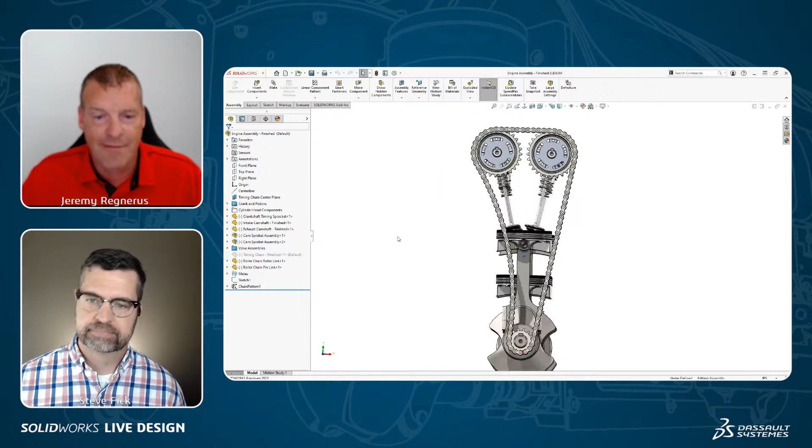Now, we're not going to get into the debate of belts versus chains in an engine design, but I want to show, some people were a little bit surprised about how a timing chain in an engine works. There's a tension side, and then basically there's a slack side on this. So I'm going to pull up a couple images here for reference.

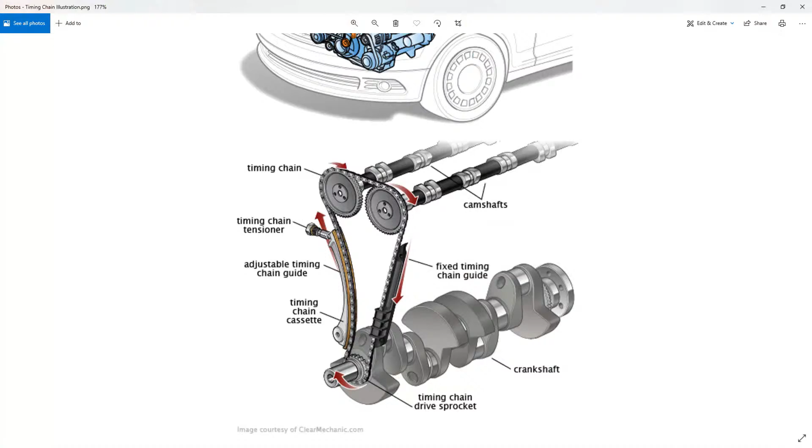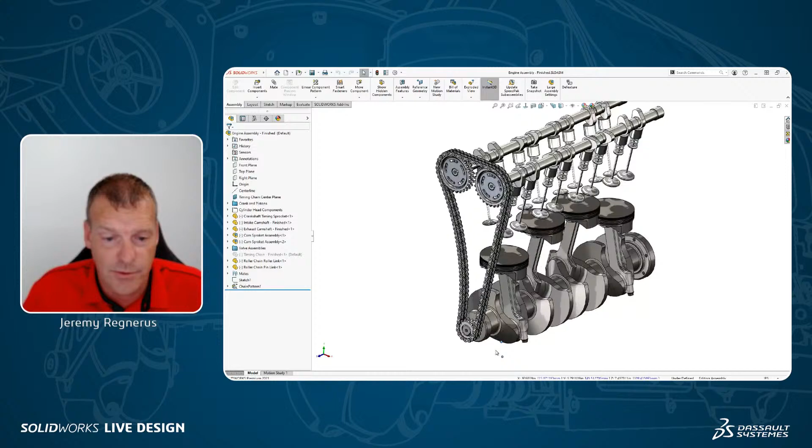Now, where are we going with this? Well, we want to get the timing of all this to work, because people really like that in SolidWorks you can do really cool motion here. You'll notice everything works here. We have a chain that's driving our cams. Everything's in time. They're at the correct ratio. So how do we get that motion in that chain? How do we design that chain? There's a couple different challenges we're going to look at. And believe it or not, we're not going to start with this assembly of this chain. We're going to tackle this two different ways, because there's really two different ways you could approach this design.

One, doing it all assembly based like this. But the other way is, how are you purchasing the chain? Is it a single part number? Well, then does it make sense to just do this as like a multi-body part right here? And we're going to start with this. We're going to start modeling this chain as a part using a variety of feature patterns.

Then we're going to actually leverage some of that information that we get there to design the moving version of this. So why don't we go ahead and dive in? I'm going to close this. We're going to start with a fresh assembly here. And I have this set up a little bit wrong.

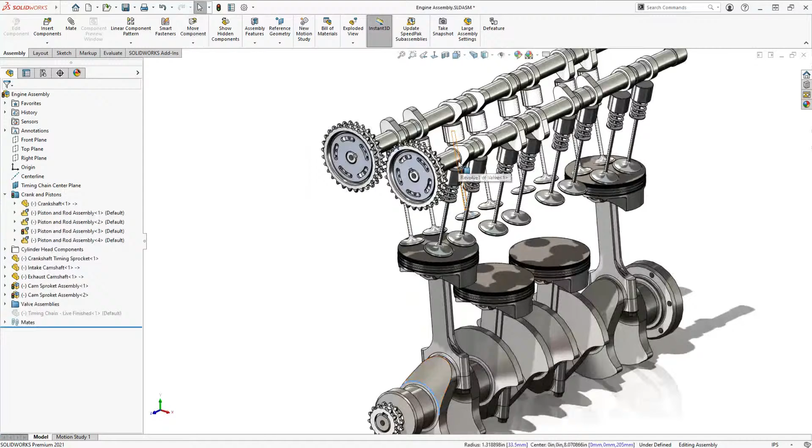We're going to mix some things up here because I want to talk about designing things in the right orientation, right? So we have all these components. They're kind of moved in weird spots. They move independently. So Steve, you can see we have a rotation here on our crankshaft. We have each camshaft kind of rotates individually. You can see I have some cam mates there on the tappets for the valves.

One of the first things we want to do when we think about aligning everything and getting it all set up right is getting it in a home position or a fixed spot where we know where every component needs to be at a certain point throughout this rotation. In an engine, that's called top dead center. That's where cylinder number 1 is at the top, and it's right before the intake stroke on a 4-cycle.

So you're saying, like a lot of us, it's that urge to grab a part, start rotating it, moving it around because we can, but how do we get it right back to where we actually need it to be for what we're designing? Absolutely. All right. So top dead center for this is with this first piston all the way up at the top of its stroke. That's why it's called top dead center on an engine.

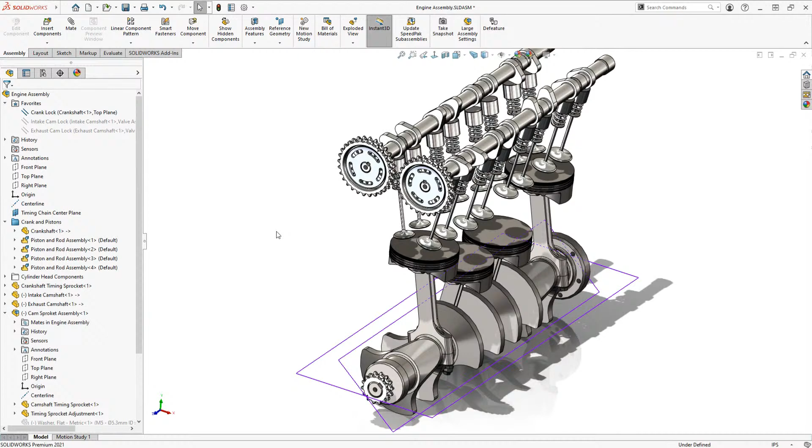So I have some mates here that I'm just going to unsuppress for time's sake. But what I've done is I've used favorites. This is a good way if you need to turn things on or off. So you saw me with motion before. I just turned these off. I could always turn them back on. I have a parallel mate that I made from the top plane of the crankshaft to the top plane of my assembly. No matter where, this is going to set that at top dead center right there. So now these components can't move anymore.

Now, what I need here is this camshaft to be right before the intake cycle starts. I have some mates here, but I might as well show how I did these. One of the things that's interesting about this camshaft design, if I hide these two pieces, is they're not straight up and down. So the first thing might be, well, don't you just want to go top to top and make those parallel? Well, now you can see my timing is off. That cam actually needs to be advanced several degrees further.

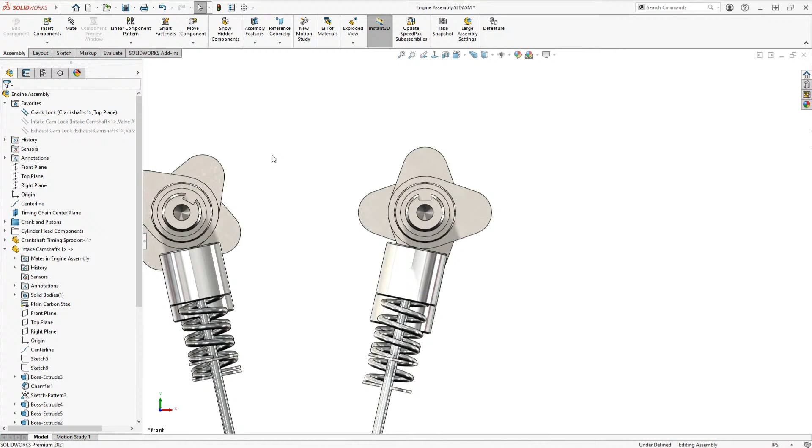So let's undo that. What I actually want is that top plane to be parallel or perpendicular to the direction that this valve is going. So in this case, I'm going to just make that parallel to the top of that valve tappet. Now, does that make sense to the audience, why I've done that? Like, to the valve and not to the assembly? Yeah, let's ask if this is making sense. Give a thumbs up or let us know if you have questions.

I think one of the questions that came up is, to your point earlier, you're just using mates. You're not using Instant 3D or anything like that, correct? No, Instant 3D is more when you're creating features in a part, and we will be leveraging Instant 3D quite a bit. This is just me grabbing these components and moving them around. And basically I've created these mates, so you'll see in the tree there's no dashed lines in front of any of these components. They're all fully defined. Now I'm going to remove these two parallels that I just created.

And Jeremy, how do we add to favorites? Just real quick, you showed the favorites.

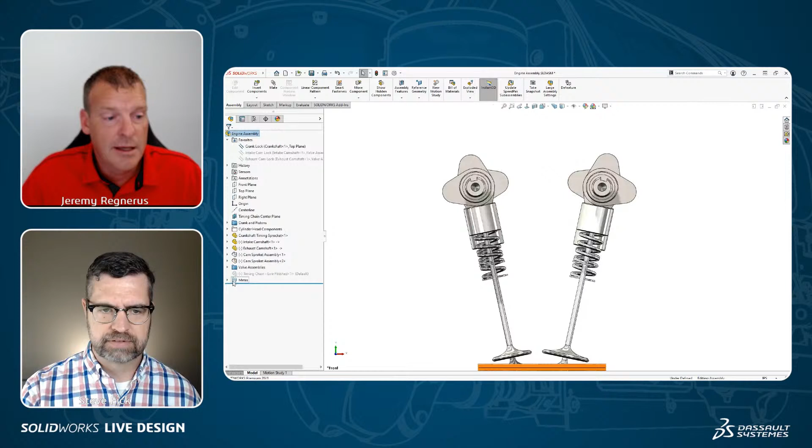I think that's an amazing tip. How do we get those there? So I have a couple mates that I need to reference, right? So I just suppress those and I want to access those. So if I dive into my mates right here, I have a mate here. I have this one called crank lock, and then I have these two parallel mates here that kind of lock everything in place. Those aren't the ones I actually wanted. Where did they go? Let me see where these are really quick.

Well, an easy way to do this, right, is I'm going to grab this component, this camshaft, and I'm going to press my D key, and I need to find that parallel mate I just had. So before we get to adding to favorites, I do want to show this. This is pretty cool. You have this ability from breadcrumbs to go grab these mates. There it is. Now I can see where it is in the tree. I did have the right ones. The parallel mate I did was slightly different.

So to add to favorites, I'm going to grab these two mates and I'm just going to right click, and you'll see here there's an option to add to favorites. Got it. Very cool. So I took the long way to answer your question. Sorry about that. No worries.

I want to make sure I have the right one there. Yeah, I do definitely have the right ones. See, there was a ton of mates in here. I didn't want to crowd this tree out with that. So we added those to our favorites. So anyway, all of our components are locked in place. So what I want to do is I want to start designing that timing chain. I'm going to turn these cam sprockets on too. They are not locked in place. So those are the wrong mates.

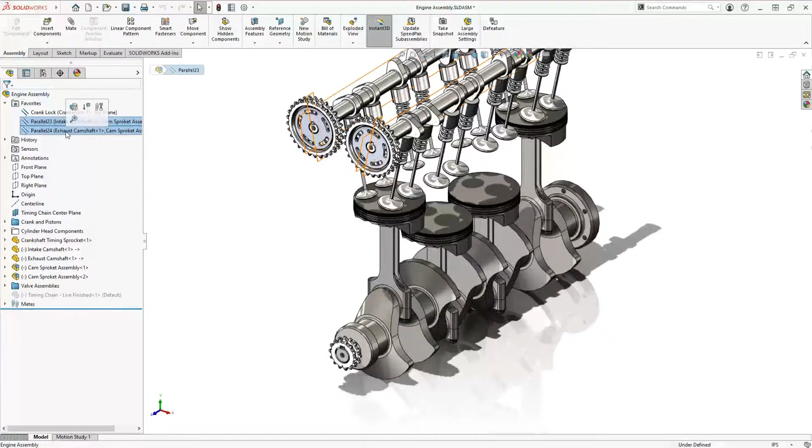Let's do this. And I think this is the cool thing about what Jeremy's showing with favorites and folders and whatnot, is that oftentimes that list of mates gets terribly long, and it is nice to have those at your fingertips, right? You're not having to scroll through or try to find them. We're able to just add them to favorites and get to them easily.

Yeah, so I did have the wrong mates. They were called intake cam lock and exhaust cam lock. So by the way, they were right here. They were named. I don't know why I didn't see these. One of the things I like to do is if I have a mate that I need to reference, I'll come in here and I'll press F2 and I'll rename that. That also helps with what you were talking about, Steve, finding that mate in that tree. If it's got a name, it's probably easier to find. Favorites are a really good way to access those as well.

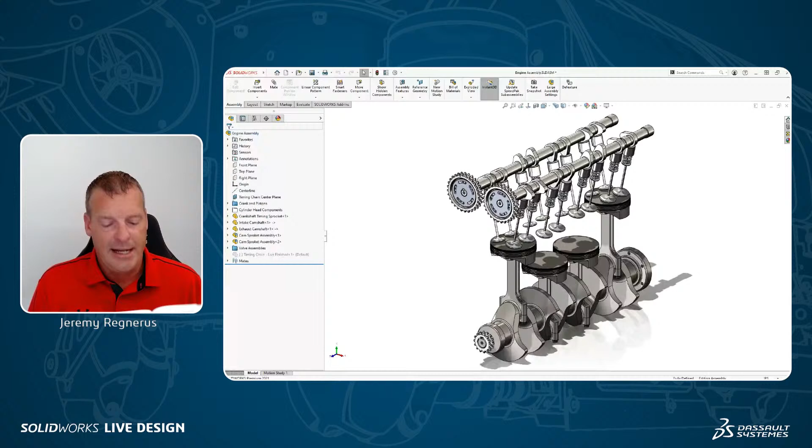All right, so we want to start designing. Let's get into the patterns part of this. So for reference, for designing this timing chain, I do have a book here. We were talking about it at the beginning of the show, the Machinery's Handbook. I'm going to be designing a roller chain, and I'll pull this up on screen in a picture. So in the Machinery's Handbook, you have transmission roller chain. I'm going to be using that for all my dimensional data.

So for reference, let's throw this up on screen. These are the dimensions of the chain links that we're going to be modeling. I'm going to have these over on the side of my screen as a cheat sheet so that I don't have to be referencing the book and looking it up in a table. But we're going to start a new part. And I happen to have a part called chain template. I did this to save me some time, because I actually used some equations. I created some global variables with all those values in it as well, so maybe I can reference those.

So, I think that's an interesting point. We do this sometimes for presentations, but part templates can store a lot of great stuff, not only equations, but geometry and all that kind of stuff that you can just start with right away.

Yeah, I did a live design last year where we did some spur and helical gears, and very similarly, I went through it. It really talked a lot about equations, and I used global variables a lot. If you want to watch that, you can go to our live design 2020 playlist on YouTube, and you can see that video where we do a spur and helical gear there.

And we really get into the equation side of this. So I'm not going to spend a lot of time on that today. I'm going to start sketching what I think this timing chain is going to look like. I'm going to draw a couple circles. And you'll notice, Steve, I'm not really locking anything in place. Let's just kind of snap these together.

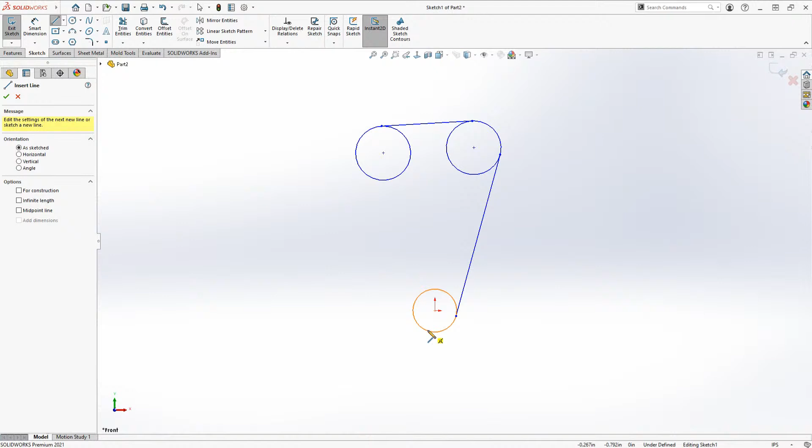You'll notice I'm using that really cool capability in SolidWorks where when you draw a line and pull it off of an arc, notice how it captures tangency there. I'm going to go something like that. Looks sort of like what we're going to be doing. Maybe. Let's go ahead and save this, and we'll talk about how we're going to use this in a minute. Timing chain, we'll just call this live.

And I want to bring this into my design. I'm going to do this just with a drag and drop to make this easy. And I'll turn on my sketches so you can see where that component is. Now, I started very loose, totally undefined sketch. What I want to do is I want to get this timing chain in position.

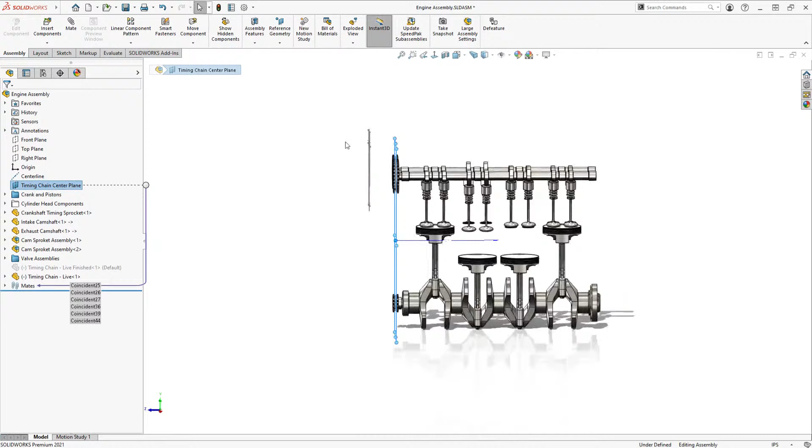Now, you'll notice I have a plane here that if we look at my right-hand view, happens to go right down the center line of this double strand timing chain. So I'm going to use that plane and the front plane of my timing chain to locate these two components. So we'll grab those two. And I really just like to use the pop-up menu here to mate those two together.

Yeah. So just a real quick recap. What you saw Jeremy do, you can tile vertically side by side. He grabbed the name of the part. He just dragged it in, and then you're just mating up the planes, right? Right, absolutely. Perfect.

And I think I've talked about this in other presentations I've given. If you have the opportunity to mate to a plane in a component versus, say, a face that you might delete later on, I always recommend mating to planes. Planes never go away. You're always going to have a front, top, and right plane. This works well if the plane is in a good spot in the component, which happens to be the center line down here. That's a great point.

What we're going to do now is we're going to define this timing chain profile. And right in the assembly, we're going to do a little bit of top-down design. Now, top-down design is where we define features of a component in another assembly. And to do this, I'm just going to click on one of these sketch components, and I'm going to choose Edit Sketch. Now, Toby Schnaars did a really good presentation on changing colors for top-down design 2 weeks ago. Really encourage you to go watch that.

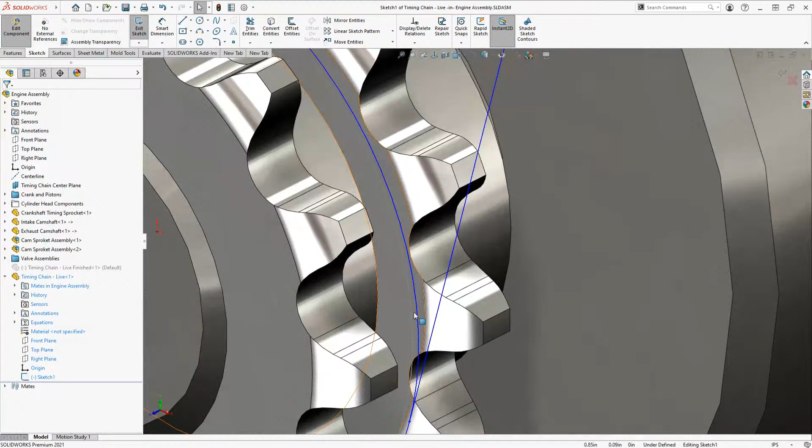I like to keep the colors the same, and then I look at the color of the component in the feature manager tree. So here you can see it's changed to this blue color, letting me know that I'm editing it. You'll notice that on each of these sprockets, I have a circle that represents the pitch diameter. If you're unfamiliar, a pitch diameter is really where those chain links are going to follow that sprocket around. And that's what I want to define this profile path on.

So I'm going to make these two circles equal to one another. And you'll notice that that line turns black, signifying it's fully defined. And we're going to do the same thing with these sprockets up here. I have a pitch diameter, and I'm going to grab this circle, and I'm going to make them co-radial. Now, for those who don't know, co-radial is the same as making them equal and concentric at the same time. It's just a 2-for-1. I like to use it a lot because it saves me some time. And you'll notice really quickly, I have a fully defined sketch now.

So before I go over to my part file, I want to take a look at this. When I set everything to top dead center in the beginning, one of the things that did is it set my bottom sprocket, or where my bottom roller is going to go, right vertical with center. So I added that design intent intentionally, so that I knew that I would be able to create that there. And that's going to be important when we start working inside of this part file.

Jeremy, real quick, we got some really great chat going on, some questions. Just to that point about going back to top dead center, we had a question come in from Dallas: is it better to use configurations or to use favorites where you're just suppressing and unsuppressing the mates? Do you personally have a preference on how you would go about that? I mean, it really depends on what you're doing.

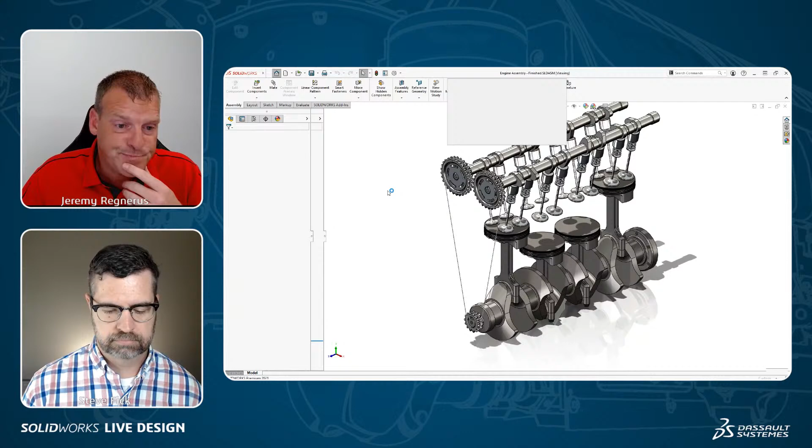I'm going to save this really quick. I'll open up the other one that we just had up. In the beginning, I actually had configurations in there. I prefer to use configurations myself more for positional changes. Oops, I opened the wrong one there. Let's open this guy. So in this example, I absolutely did use configurations. So here I have a configuration where all of the features are fixed and I'm using a single part design, but I also have another configuration which is not named very well. And this configuration is the one that allows all of the motion.

So absolutely, I always think it's a good idea. Pneumatic cylinders are a good example, right, Steve? You have an extended position, a retracted position, and then a lot of times I'll use a free floating configuration in there. So I think configurations are perfect for that type of thing. Yep. When you kind of understand exactly what the motion is that you want, but I feel like favorites sometimes are just an easy way to just be playing around with mates until you've firmed up that configuration that you're after.

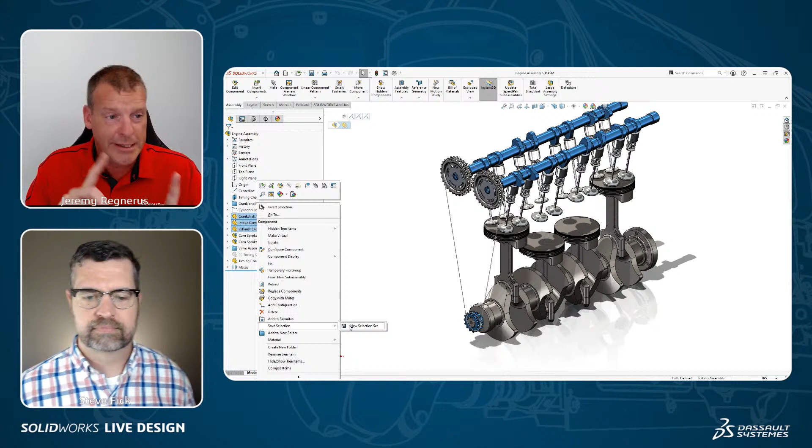And a few folks out there who have started using SolidWorks 2021 may be aware, maybe it was 2020, we added this other thing called selection sets, where you could create a selection set. They don't actually work with mates in 2021. That's why I use favorites. So that's an enhancement request to get submitted, that mates can be part of selection sets there. Good to know. Just a tip.

All right, so we're going to open this up. I want to get started on the actual design. So this sketch, we'll call this our chain path. I'm going to give this a name. You'll see me naming things quite a bit. One of the other things is, I'm going to tile, you'll see me jumping back and forth quite a bit. I drew that sketch right down the center line of this chain, but I actually want to be designing my roller on this front half here.

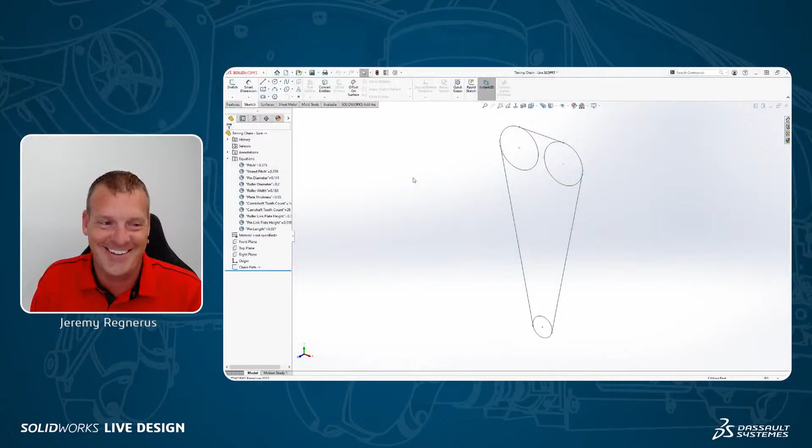So what I'm going to go ahead and do is I have one of those dimensions in here that we saw, our strand pitch, 0.399, crazy weird English number. Sorry, we're using inches for our international audience. I have looked high and low to find metric roller chain, and they all refer to the ANSI standards. So it kind of all falls back to these bizarre numbers anyway.

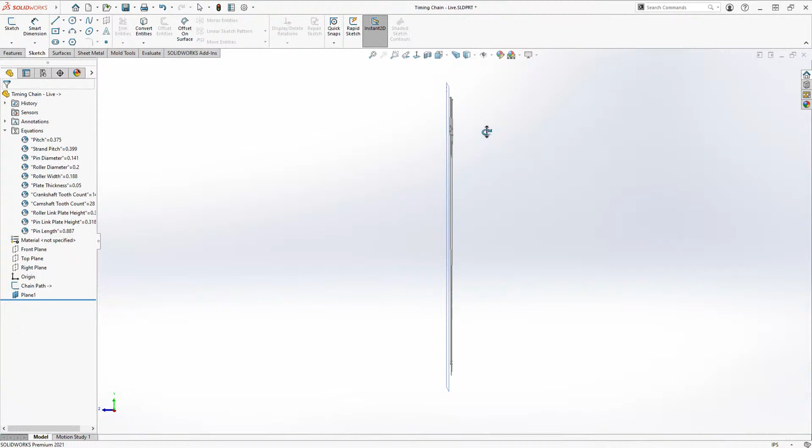Well, what I'm going to do is create a reference plane that we're going to leverage here. And I'm just going to drag this out, some arbitrary value right here. I want to drive that offset. I want that to be half of that strand distance. So I'm going to double click on this. We talked about this in my last live design that I did last year. I'm going to grab that strand pitch, and I just want that to be half of that value. So I'm just going to type strand pitch divided by 2, hit OK, and then do a quick update, and you'll see that that plane has now got that correct offset. We're going to be leveraging that.

The other thing is we're going to be creating a lot of circular patterns, and I need the centers of each of these sprockets right here. So I'm going to select my front plane, grab the center of the circle right here, and I'm going to grab an axis, and I'm going to do this 3 times. I want to create a rotational axis about each of these circles. So I'm setting myself up for something I know I have to do in the future. Keep in mind, you don't have to do this at the beginning of your design.

And for those of you who are wondering how I'm confirming so fast, I use mouse gestures and I just swipe really fast. So I apologize if the people online aren't seeing me hit that OK button that fast.

Yeah, I was just going to say, you're using the S key to access it super quick, right? Right where your mouse is, and then mouse gestures to just confirm it once it's done. Yeah, I love the S key. I love the mouse gestures for quick actions. I use them for my view. You don't even see it. I'm so used to it. So there's my front view, top view, my isometric view, and I do it so fast that you don't even see it sometimes. So I apologize. I'm so used to doing that.

Let's name this. Let's call this front strand center, and then we're going to name these. I'm going to call this crank center line.

We'll call this... While you're naming those, just a few shout outs. Todd is saying he absolutely loves the top-down design. So you got some good thumbs up there for sure. Yeah, good job.

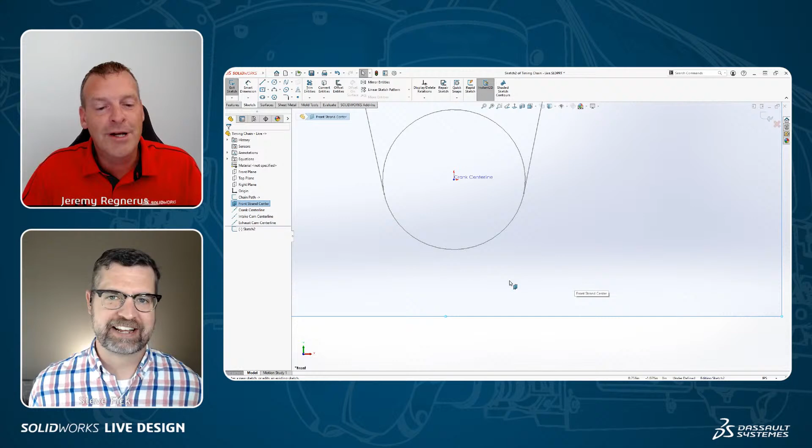All right. So we've got a bunch of reference geometry we're going to make use of. Because of time, I'm going to get going a little bit quicker here. So we're going to start by creating, I'm only going to be working on these rollers right now, kind of for the sake of time. And again, you'll see me type in dimensions. I kind of know what these are. So I'm going to do 0.2 right here. I'm just going to get that outside diameter of that roller.

And if I wanted, I could get really clever here. I want these two to be vertical because I talked about that vertical alignment. Now, if I wanted to get really clever, I could actually come in here and I could do a link value. And you'll see here, I have my roller diameter. And now if I were for some reason to come over into my equations, I could change that roller diameter value right here, and it would update everywhere that value is used. Again, go back to the previous live design to take a really deep dive into that.

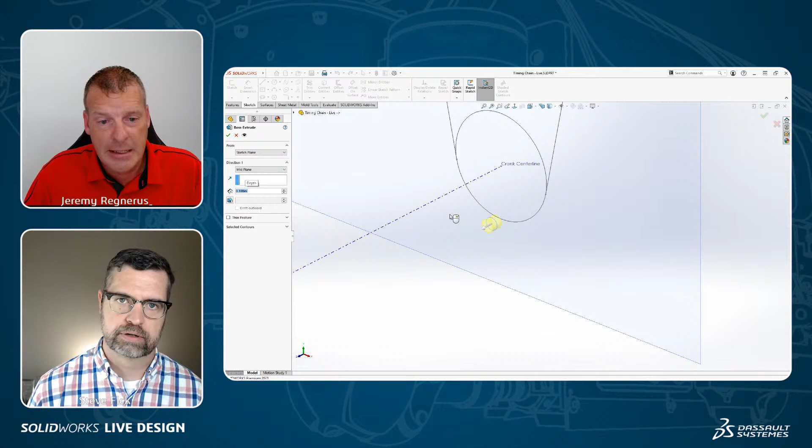So as Jeremy started to draw this out, what you're seeing is just this idea of placing those rollers on the pitch diameter, which is the center line of where that chain is going to hit the sprocket and line up where it needs to be from there. Mike Puckett is also making a great shout out here, saying that the chain and belt is actually part of the CSWE. We're going to take a look at chain and belt here in a little bit. Actually, the assembly feature also. Yep.

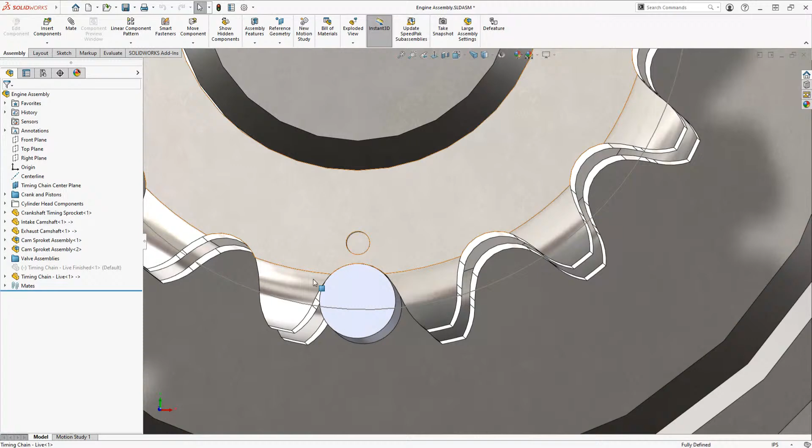So what I've done, you just alluded to this, Steve, is if I go back to my assembly and I look at what am I actually doing? Why are you just drawing this cylinder out in space? What I'm doing is I'm creating that roller that's going to live right inside of that sprocket. So hopefully that makes sense, why I captured that pitch diameter, because I know if I put that roller on there and I design that to the right size, that's now in the appropriate location. That's kind of why I've started there. And the roller is the easiest way to start.

I want to take a look at, okay, so how do we pattern this at this point? And I'm going to shut off my axes and my planes. And I'm just doing this with hotkeys. This is the same thing as coming up here. I've made hotkeys, Shift A for axes, Alt A for temporary axes, Shift P for planes. So you'll see me turning stuff on and off quite a bit. And the first question I expect is why wouldn't we do this just with a curve-driven pattern?

So I'm going to create a new sketch because I don't want to lose my original sketch here. Let's create a curve-driven pattern really quickly to take a look at why or why not we would use a curve-driven pattern. So for those who don't know what a curve-driven pattern is, I'm going to come here. I don't even know where it is in my command manager anymore, Steve. I'm so used to going into my shortcut menu. So you have this pattern type called curve-driven pattern.

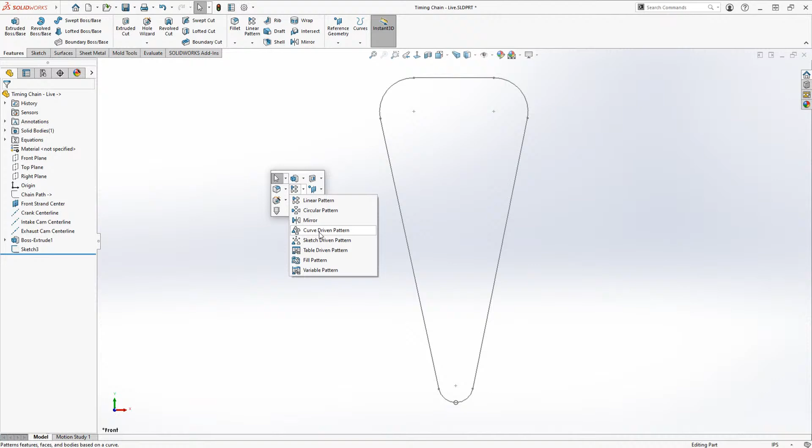And what we're going to do is we're going to pattern a body, okay? So we're not going to pattern a feature because I know that the distance between each of these links is 3/8 of an inch or 0.375. So I'm going to grab that body, and that's going to create a multi-body part file.

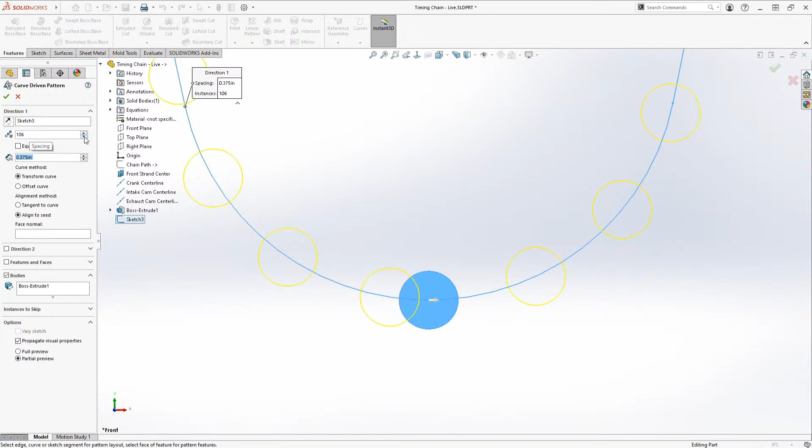I also need to choose my path, and I'm going to just expand my tree, and I'm going to grab that sketch. And then we're going to set our pitch right here. What's our pitch? 3/8 of an inch. That looks really good. There is something strange going on right here. These don't quite line up. Is that because I have the wrong number of them? I don't know. Let's go take a look at what happens in the assembly when I do that.

So what you're going to see here, if I zoom in down here, is this looks pretty good. But right, you see it right away on the first link. Notice this, Steve. Notice this little gap right here that's starting to happen. Yeah, I see it. And that gap gets bigger, and that gap gets bigger. Let's ask the audience, why do they think that gap is getting bigger when I do a curve-driven pattern?

Yeah, if you know why this is happening, if you've got kind of the deep cut answer to this, Jeremy's going to obviously let us know. But let's see if you guys can guess why this is happening on this design in the chat.

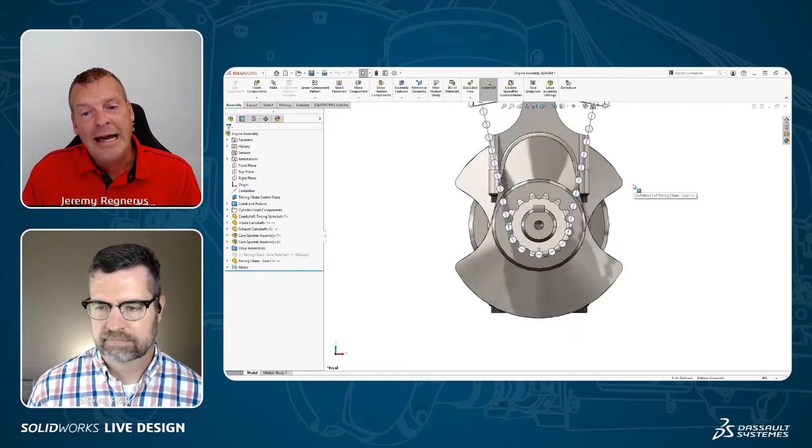And you can see here when we get around to the other side, it gets really clear. Now that could be because we don't have the right number of links and we have that transition. But I really want to talk about this gap that's taking place here. I'll give you a hint. It has to do specifically with chains. Okay. Right? All right.

So I'm going to start a sketch. We're going to talk about this problem right here. I'm going to start a sketch, and I'm going to do some convert entities right here. I want to tell the story better, so using all the wrong tools. So let's create an arc here. Let's make this arc and this line equal to one another to tell this story. All right, so we're going to give the answer here.

Are there any answers in chat yet? There is a delay on the chat, Steve. It looks like Gary's saying, could it be that that isn't adjusted to the proper polar coordinates? And Timborora says the circumference, pitch. Yeah, so Bocek's jumping in with pitch. So we got a couple good answers. All right, well, let's take a look.

So we set the distance between those two components to be 0.375 in English units, 3/8 of an inch. Let's dimension to the centers of these circles right here. And what is going on? Look at this value, Steve. That's not 0.375. No. So what is 0.375? Well, this distance between this center and this center, if I draw a line right here, is what we call a chordal distance on an arc. It's the distance between 2 points on an arc.

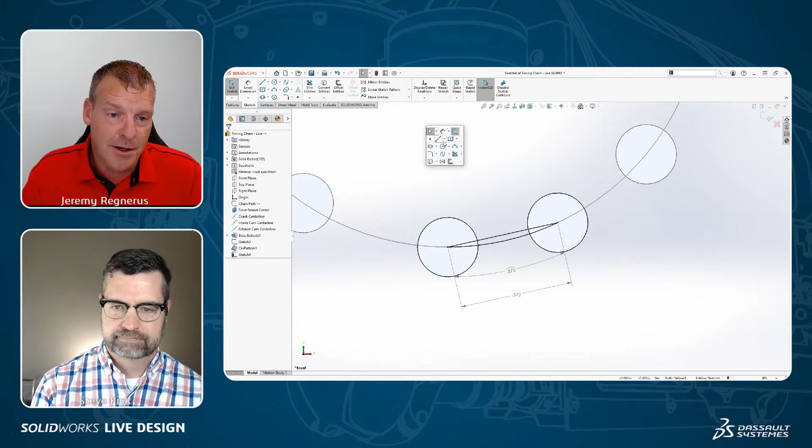Now, the reason that dialog's popping up is these are fully defined sketch entities, so it's just telling us these are reference dimensions. Here's another tip along those lines, Steve. What if I wanted to define the angle between these two? Oh, yeah. You do very similar. You can go center to center, and then if you pick the center of those points, look at that. It'll tell me the angle between those 2 points without having to create construction geometry. So many good little tips.

Yeah. Many. So we know that curve driven doesn't work because curve driven doesn't actually have an option for chordal length.

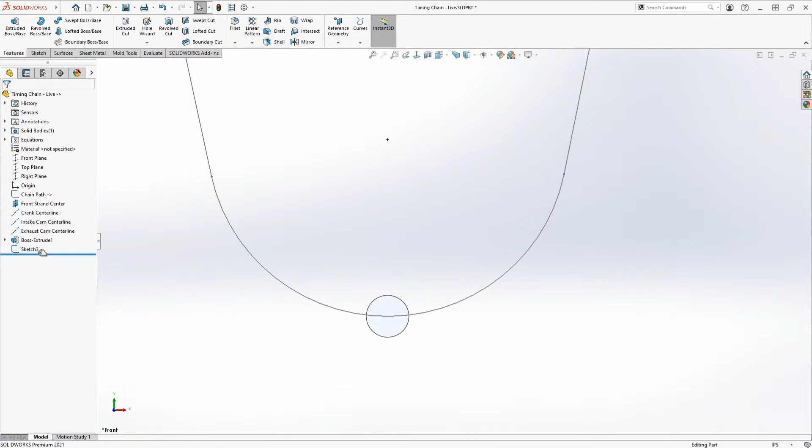It's not necessarily meant for just chains. Yeah. So let's delete that. Let's look at, so now we have to solve this. I'm going to call it the hard way. And I'm going to delete this sketch and I'm going to turn the other one back on.

So we're going to leverage some other pattern types here. What I'm going to do is I'm going to start by leveraging this circle. And we all know, I think at this point, that we're not going to end up with a straight line here. And I'm going to tell you it's going to confuse me. So I'm going to delete this guy. And we'll come back to figuring out that arc later.

All right. So we're going to come in here. We're going to create a circular pattern instead. And I'm going to leverage bodies here. And we're going to choose our axes. Now, you saw me create an axis there. And the reason I did that is because you can't actually use a sketch circle as your axis of rotation. So I'm going to go up to my view key, view axes, and turn those on. And I'm going to select that crank center line.

Okay. Now, there's 2 ways of defining this. We have to get that dimensional value there. Well, I know I have 14 teeth on my sprocket, so I could just say equal space 14. Now that's going to go all the way around here. So how do I get rid of some of those? Well, you can actually do this option called instances to skip, because we know that I don't need that full rotation of entities. Right, right.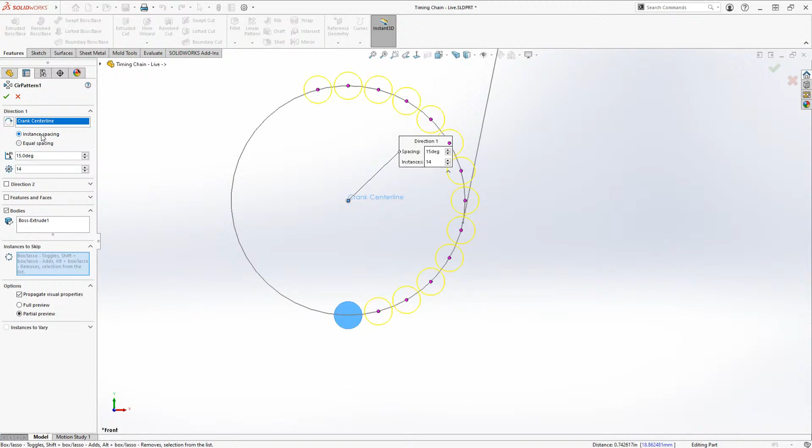Now, the other way you could do this is you could type in the problem here. You could type in 360 degrees divided by 14, and you could do instance spacing this way, and then you could come back and do it that way. There's no right or wrong way here. In fact, this way you could drive with an equation if you wanted to.

I'm going to do equal spacing. I'm going to set it to 14, and then we're going to go in here. We're going to get rid of some of these instances. So we're not going to create a roller bearing in space where it doesn't belong, right? We want these roller bearings to go up this line. So let's go ahead. Let's delete these. We're just going to remove these instances.

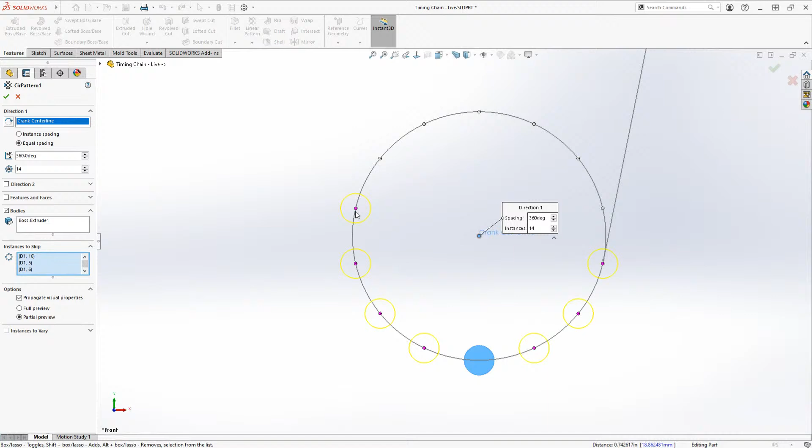And now we get into this weird conundrum of, well, where does that curve that we're going to create later start? Right. I don't know. Let's just leave this here. I think it's 3, maybe 4. I'm going to leave it. Because guess what? It's parametric. We could always go back and edit it, right? Yeah, yeah. All right. So we've started this.

Now what we want to do is we want our roller links to go up and around. So we're going to create another sketch. And here I'm going to start getting fast because we're at 11:34 right now. Yeah. So I'm going to draw a circle. I'm going to show you a tip that I really like here that I just learned. Well, I'll show it to you on the next pattern I create, actually.

So what I'm going to do is, for simplicity, I'm just going to make these 2 arcs equal to one another because I know that they're the same diameter. And I want to set the distance between the center of this and the center of this, that chord length or that linkage length right here. And I'm going to grab these 2 arcs, and there's something wrong with this dimension right here. And that's the vertical spacing between those. Some users have run into this, where it's flipping around.

So this is the dimension I want right here, right? I want that distance, but I want the dimension out here. You look at your cursor, Steve, there's a little blue icon on the right mouse button with a lock. This will actually lock that angular dimension or that aligned dimension. So now I can pull it out. Now I can go ahead and I can type in that 0.375. I overlooked that for the longest time until I was like, why is the mouse blue? I'm like, oh.

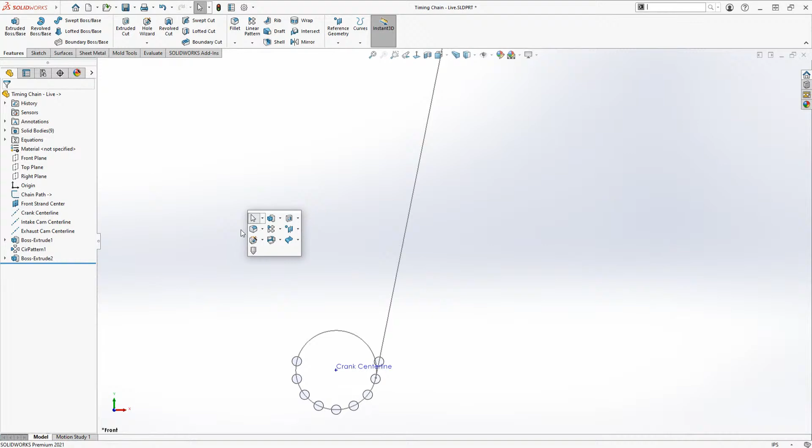So we're going to go ahead here. We're going to go to a linear pattern, and I'm going to select my direction. And again, we're working in multi-bodies because none of these touch. We're going to grab this body. And we're going to set that chain pitch, that number we looked at before, that 0.375.

And now I have to figure out in my head, how many do I need? 6, 7. This is going to take a really long time. This could take a while, man. We're tight on time. All right.

Well, let's try a really cool option that came out a couple years ago inside of SolidWorks that I absolutely love. It's called Up to Reference. And maybe I don't care about how many there are. I just want them to have a spacing of 0.375 and go up to this point. Yep. Look at that. It automatically figures out how many of them I need. It stops right before it gets to that point and it won't create any more.

This option rocked my world when it came out. I remember back to all the machine design I was doing. I was like, where was this? You need to create 3 cap screw holes equally spaced along the edge of the plate, because you can do that as well. Maybe you don't want to use spacing. Maybe I just want 20 of these equally spaced along a line.

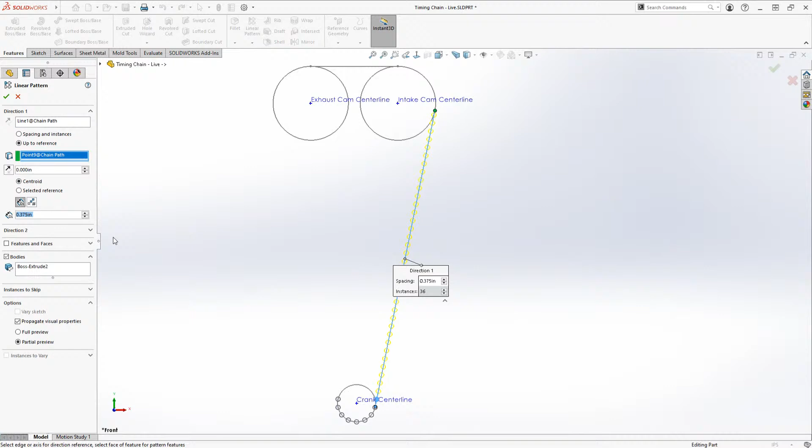And now notice when I changed this option, it placed the last one on the endpoint, and then it equally spaced 20 of them along that line. So there's 2 different ways to tackle this problem. We want the pitch to be the defining factor here, though. Right. All right. So we've created our next pattern. We've used a circular pattern, then a linear pattern. Guess what? We're going to create another circular pattern.

I'm going to show you some really cool ways to sketch quicker when you're doing circles like this. So you saw me grab these 2 arcs and make them equal to one another, and then I manually added a dimension, right? So I went equal. Look at this. Just like xDesign on the 3DEXPERIENCE platform, in SolidWorks we added this auto add dimension. And guess what, Steve? It does the aligned dimension type. So I can just click this and type 0.375, and I'm done. Let's extrude this and get on our way. Pretty cool tip right there.

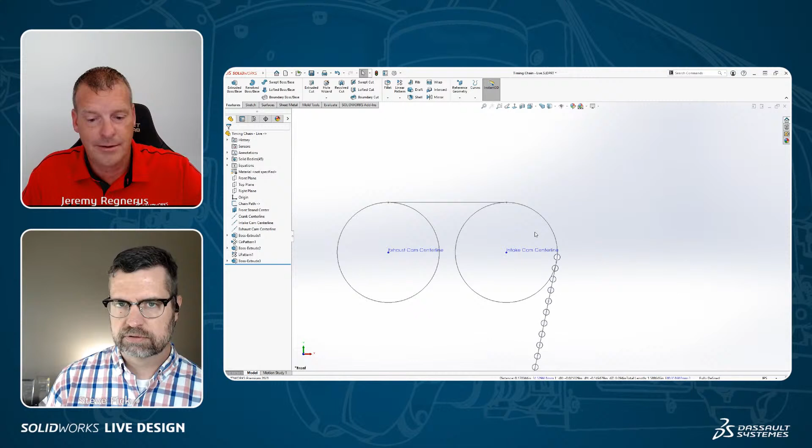That is awesome. Hey, real quick, we had a question from Dallas. He's saying that there's no curve-driven pattern for sketches, only features. Correct. So what he's talking about is, say I start a sketch. We have sketch-driven patterns as well. We only have linear and circular patterns for sketch-driven patterns. And we're going to use a circular sketch pattern here in just a moment, actually. That's correct. There is not a curve-driven pattern within the sketch environment.

Got it. Okay. So here we're going to use this axis that I have. We're going to do the bodies. It's going to start to feel a little repetitive. But last time we did equally spaced. There are 28 teeth. If you don't know, a cam has to move at half the ratio of the crankshaft. So we use a 2-to-1 ratio. So I need double the number of teeth on this sprocket. I don't really want to go through and do instances to skip on all these.

So this is actually what I was going to reveal. You could just come in here and do 360 divided by 28. And then we're just going to do this. Let's turn off instances. We're just going to change this number. And again, this arc right here, this is where it gets a little tricky. I want this roller pin to fall on this horizontal line right here. So we don't want that sketch entity.

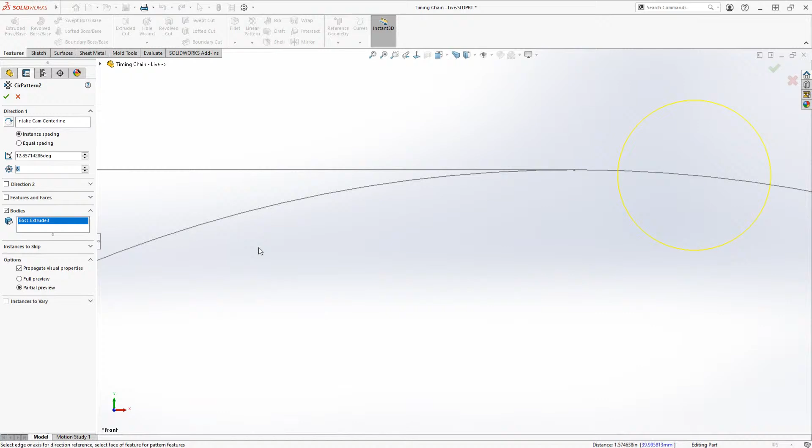Yep. So you've seen 2 examples in a circular pattern. You can do equally spaced, or you can do the traditional driven, but you can type equations in there to do that. I'm going to go ahead and add the next rollers. No new tips or tricks, so I'm just going to be really fast. You're going to see me do this thing again where I go equal, auto insert, type it in. And then here's another cool tip.

If you have Instant3D turned on in your features, if you're in a sketch, I don't know if you know this, you can just double click in the background to exit the sketch. And then that'll keep that sketch selected. Hit extrude, right click mid-plane, and then watch this. Here's my mouse gesture. How fast is all of that?

It's amazing. Lewis chimed in and said, this live stream is amazing. Take your time, please. So I think you've got some fans.

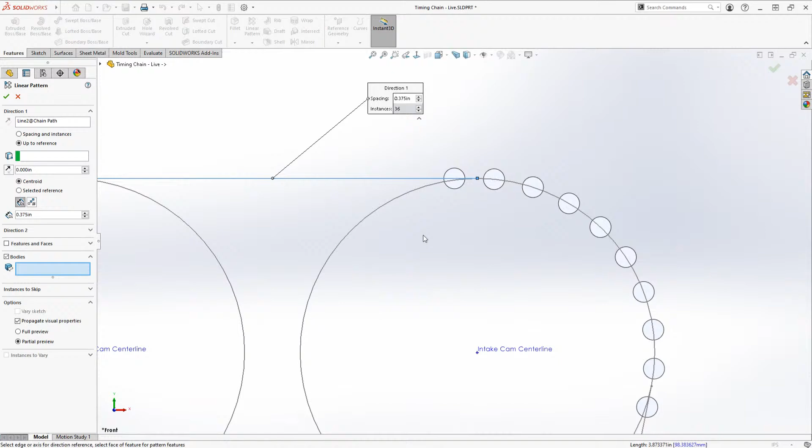All right, cool. So we're going to do what we did before here. We're going to do an up to reference. So watch, see how right now it's just throwing these out indefinitely. We're going to do an up to reference up to there with our 3/8 of an inch pitch. We're going to go ahead and hit OK. And then we're going to do our last arc. Again, nothing really new here, except we're going to have a thought step that we're going to have to go through. So let's do this again.

I love this tip right here, this equals, and this auto insert dimensions. So that's an example of where we had something on one of our xApps. We brought it over here into desktop, and I absolutely love that.

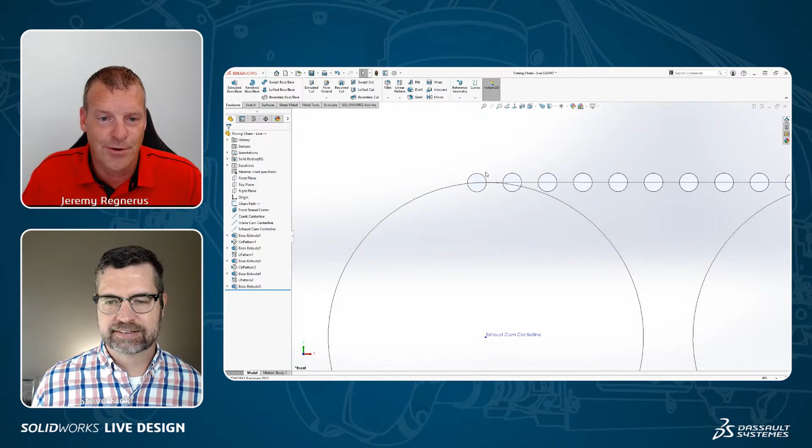You know what I wish we had in desktop that we have in xDesign, Steve? What's that? You know how I'm making those circles equal to each other all the time? Have you ever done the thing where you can sketch in xDesign and you just touch a circle and you can make them equal just by touching another circle? Have you ever used that? So cool. Oh, it's so cool. I love that.

All right, so let's go ahead here. Circular pattern. We're going to grab our center line. We're going to grab our bodies. I'm sure this is getting a little redundant, and we're going to flip our direction. What is going on? I grabbed the wrong thing. I grabbed the chain path. There we go. And again, we're going to set our value to be 360 divided by our number of teeth. And here again, we're kind of stuck with this, like, how far do I need to go? I don't know. That looks pretty good, I guess.

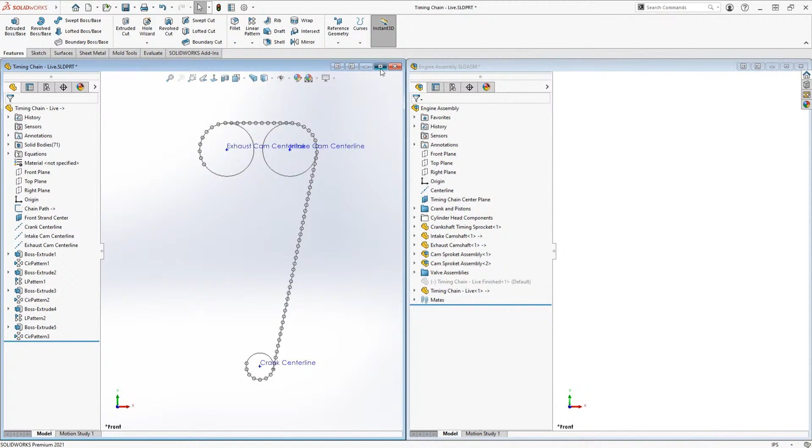I'm guessing. So here, I wish I could tell you I had a raw mathematical formula for how to figure this out. And I'm guessing you could with some crazy trigonometry, but I don't want to bust out a calculator and do math. I want the software to solve this problem for me. So this is where we're going to look at solving probably the hardest part of this. Just for reference, I'm going to open this up so everybody can see this again. We're going to figure out this arc, how it comes off of those sprockets, and how to get that arc to be nice and smooth in its transition. Yeah. I've been wondering how you're going to tackle this.

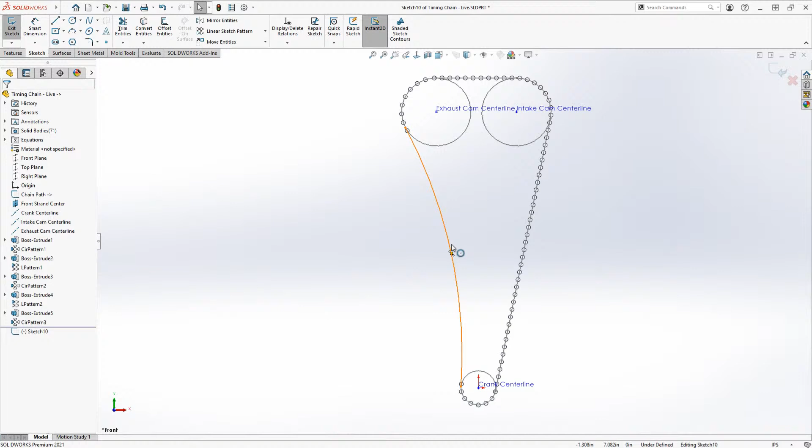All right. So we're going to start a sketch again on our front strand center, and we are going to draw an arc between these two pitch diameters. Remember, these are pitch diameters, not the outer diameters. We're just going to make these tangent to one another. Now, the first thing you could do is be like, well, you're just going to throw a radius on there and guess? We're going to do something a little bit different here. I am going to draw my circle. And this time, I'm going to make it equal. Now, I don't know how many of these I actually need here. So I'm going to grab one that I know I'll never delete. I'll make that equal. And I'm going to start with this arc.

Ooh, before I do that, how many roller links do I already have in my design here, Steve? And I cheated. I kind of moved my cursor there. You know an easy way to tell how many pattern instances I've created already? I'm gonna let you reveal it. I do know. Okay. So it's actually over here, because we've been multi-body. Every body represents a single roller. Yeah. So I know that I have 71 bodies in here. And what I'm trying to avoid is what is called the dreaded offset link. I don't want to create an offset link. I want to have an even number of links.

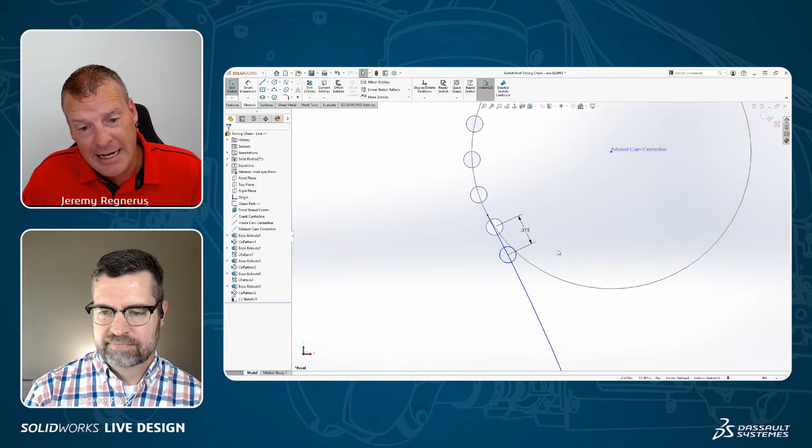And that means I need an even number of rollers in my design. Okay. So that means that I have 71 rollers already. That means that I need an odd number of additional rollers. So keep that in mind. What we're going to do is we're going to add our dimension. We're going to add our pitch, 0.375. And now I need to create a whole bunch of these.

Now, I'm going to make this construction because I don't want it to get in my way. So how am I going to do this? Well, sketch patterns. We just talked about sketch patterns. I'm going to create a circular pattern. And I'm going to give you a pro tip here, Steve. I'm going to actually select what I want to pattern first. And the reason I'm going to do that is because if you select the center first and then you select that arc, it'll change what it thinks you want the center to be.

Oh, yeah. I'm going to grab this, and then I'm going to go grab the center of that arc that we just drew. And I don't want to use equal spacing because I don't want to have a bunch of circles in a row. So I'm going to go to dimension the angular spacing. And I know it's not 90 degrees. Let's start at 5 degrees.

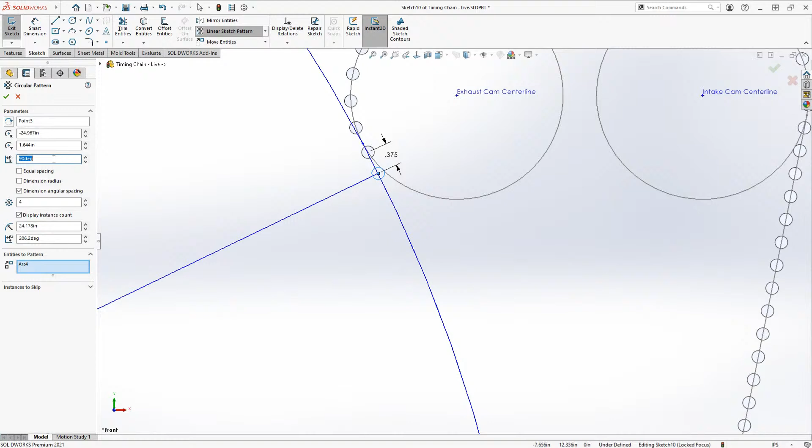And now these previews are going to be a little bit hard to see. That's clearly too much. So let's just get this close. 2 degrees, that doesn't look like enough. 1 degree, that might work. And then how many do we want? I don't know yet. Let's just add some.

So when I specified on a sketch-driven pattern that I wanted to use an angular dimension, it did just that. It added 2 pieces of construction geometry, and it added an angle. Now I've got to figure out what this angle is. That's just as hard as figuring out the radius of the circle. I don't want this. Let's delete this. You're probably going, why are you deleting what SolidWorks did for you?

Well, so here's what's happened. Even though I deleted that angle, notice that all of these arcs still act in a pattern. In fact, if I turn on my sketch relations, you can actually see that they're instances of a pattern. So again, I have a hotkey, Shift R. Otherwise, you could come into here and, I'm not actually sure where it is. It's somewhere in here. I use a hotkey, so I forget where I put it, right here. Here it is, the symbol right here. I've used hotkeys for so long.

All right, so I still want these to follow on these arcs. So this is pretty cool. I'm going to select one instance in this arc, and I'm going to make their centers coincident. And it looks like it's pretty close, but it's not quite on. So I'm going to grab a third instance, and when I make these coincident, they now all will follow that curve. Oh, nice. Because you deleted the angle, but the instance count and the relation is still there.

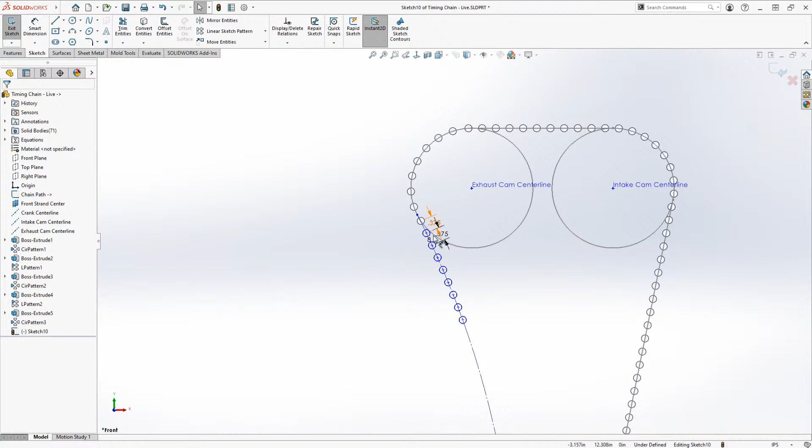And here's how I'm going to get the curve length. I am going to dimension the distance between two of these. I'm using the curve and the pitch. And now those are equally spaced along that curve. So all I have to do now is increase my number of instances here. So I'm going to right click on this. Now I could come up here and I could double click on this number and change it. But I'm going to show you a way to get back to a sketch driven pattern.

If you right click on any instance in a pattern, you can do edit circular pattern. And then I can just come in here and go, well, let's get this till this looks about right. Nice. So we want to get this about there, looks pretty good. And how many is that? 33. So I have an odd number. This looks like this might be pretty good.

All I have to do is put a dimension between here and here. And I don't want that vertical. So here's where we're going to get it. This is where it gets tricky. So I'm going to watch for that dimension to change. See how it changed very briefly. And then we're going to make that. I did that right click thing. Oh, no, it's not going to work. Why isn't this going to work?

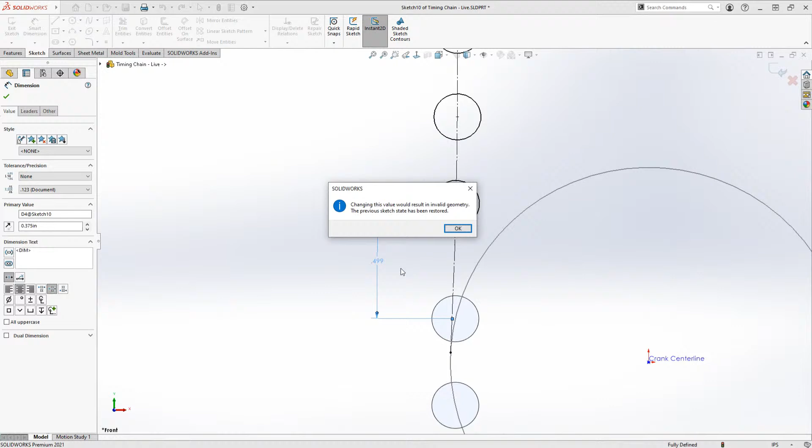Well, guess what? 33 instances isn't enough no matter how hard I try to get that within 3/8 of an inch of that other roller. Okay, so that's a problem. I can't get that close enough. That means that I actually have to add some slack into here. Okay, so let's go ahead. Let's edit this pattern again.

And now we know that we want an odd number. 33 is not enough, so let's just go to the next one. Now this looks like I have way too many, right? Like, oh my goodness, that's horrible. I don't want that much. So this is where you have to do a little bit of thinking, tinkering around with this. Like, how many do I want?

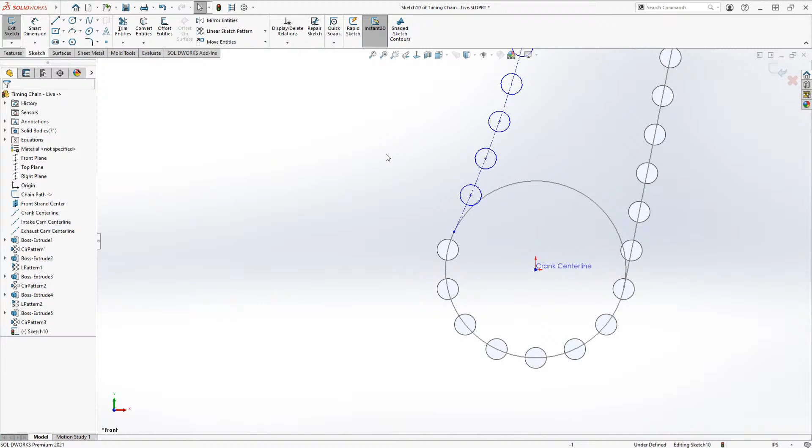Well, what can I do here? Can I shift where I start and where I end? Like, can this one come down to here? Because if I come in here and I dimension, and I'll be honest, this is where you spend a lot of the time solving this problem. Actually, no, I think I got it just right. I did. Okay, never mind. So this is good because we're short on time.

Originally what I was going to do is have the wrong number of links, and I just guessed. It looks like I have it right, because what you want to do is make sure that the first link is on this arc. Right. If this link was out here on this circle, that meant that you had the wrong number. And again, for the sake of brevity, I'm going to just say, guess what? We did it right the first time.

I don't feel like I did. Listen, we're engineers, we're SolidWorks users. Of course we did it right the first time. Yeah, for some reason that number doesn't feel right to me. But anyway, let's go ahead. Let's extrude that.

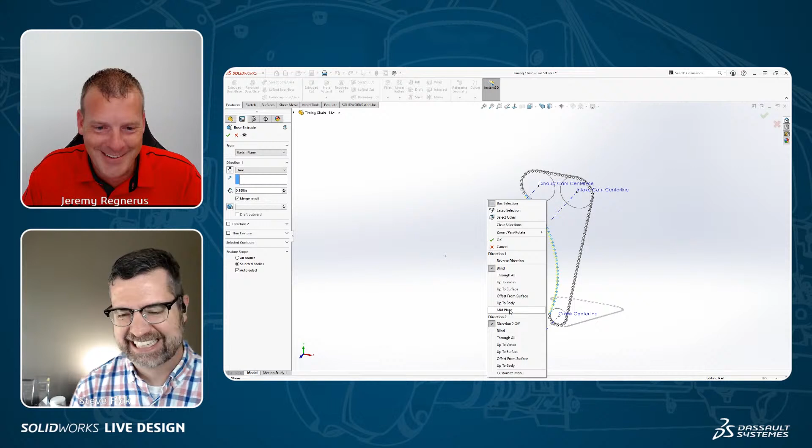So real quick too, we got an interesting comment in the chat saying that we need a showdown between you and Too Tall Toby. Toby going head to head. Toby would kill me. He's so good. Toby's the best. You guys are both amazing. I would probably pay money to see that as well.

So here we have our chain profile that we want to work with. Now at this point it gets really boring, I'm going to be honest. If we wanted to model this whole chain, we would basically start modeling the chain links, and I would basically use the same techniques we've seen already. I'm just going to type in this number. If you look on that chart, it's, oh, it didn't take.

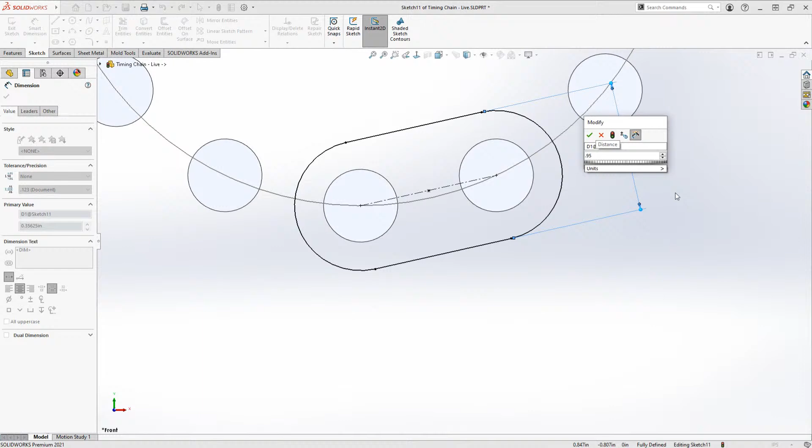The width or the height of these links are, strangely enough, 0.95 times the pitch. And we're just going to put that in there. And what we would do is start adding these links. I want to get to the assembly portion of this. We would add this link and then we would pattern those around. We join them all up. But you're going to get to this arc and run into a similar issue. How can we take advantage of this pattern right here?

Well, you saw it earlier when we were creating reference dimensions. If I come in here and I edit this sketch, remember the angle that we deleted, Steve? Yes. I'm going to go back in and add the distance between two links here. Not two links, but distance from one instance to the next. And we're going to add an angle, and the sketch is fully defined. So it's going to tell me that this is a driven dimension.

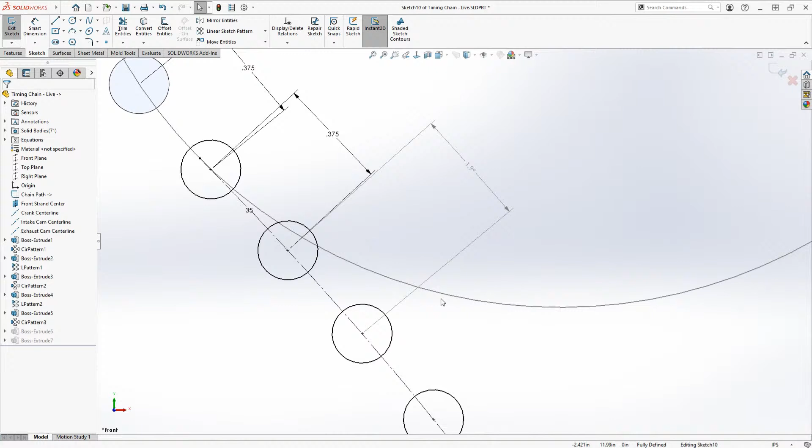No, you know what? I did that wrong. I want the distance between two links. I'm going to go from here to here. And here's that tip again: dimension to the centers of the two endpoints and then to the center. Yeah, something's wrong here. I don't have the correct number. Anyway, we'll deal with that in a minute. So you would eventually get to a point where you would have to create a pattern here. I'm skipping creating the rest of this. And we're just going to throw a dimension on here.

I think while you're doing this, the thing I love about the driven dimensions is that, of course, they show you the value that it's there, but that then becomes available to put into an equation or to reference in any number of different ways. So even though it turns yellow initially, it can be really valuable. That's exactly how we're going to use this, Steve.

I'm going to go back. I got to get this sketch. I'm going to show it. I'm going to try to go fast. We're going to add one of these axes here really quick, because that's what we would have ended up doing when our link got around to here. We would have ended up creating a circular pattern of this feature. Now we can use features because they start to join.

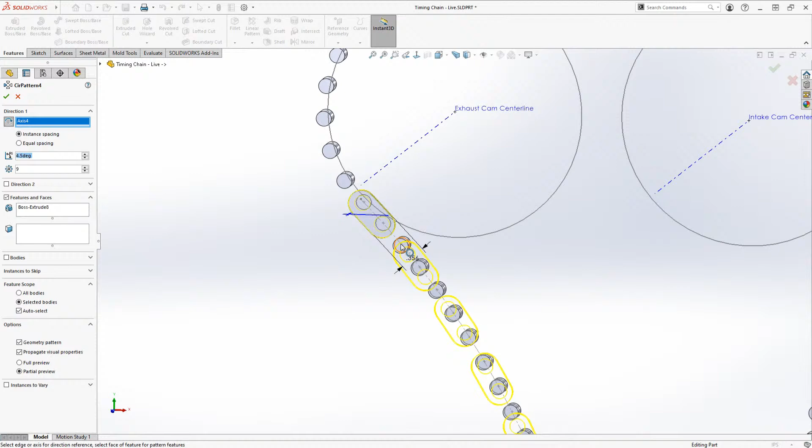We would have chosen this axis and we would have been presented with an option like, what's the spacing? Well, I saw it was like 4.5 or something like this. And yeah, I actually needed to go the distance between three links. What I can do is I can actually double click on this pattern. Patterns are one of the things where the way you access the dimensions is a little harder, but I can pull this dimension out and if I double click on it, I could drive an equation here.

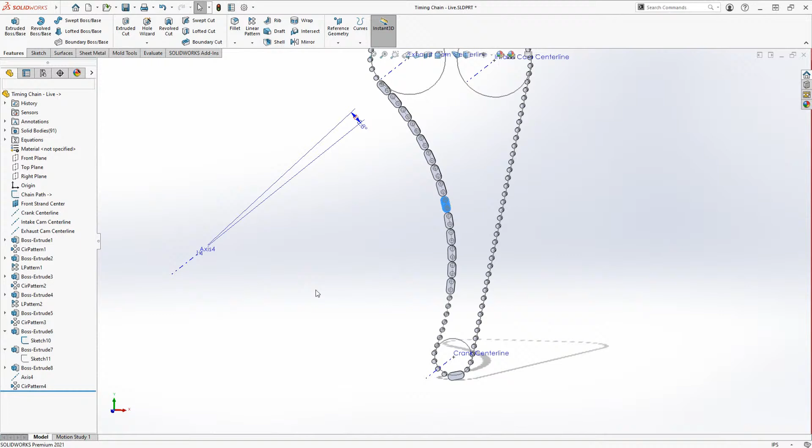So I could go equal to, we're going to say this value times 2, hit OK. And I hit rebuild. Look at that. Now all my links are done. And then all we have to do is change the number of instances we have here, maybe like 14. Boom, we would figure that out. Right. So we would continue along here.

I'm going to close this for right now. And we're going to pick up. We're going to do Martha Stewart style here. I just did not save that. I literally just said don't save that. That's fine. We'll do this.

We're going to unsuppress the one we have done right now. So basically, I would use patterns in that same fashion to drive around, and you can see I create a whole bunch of patterns, pattern it around, and then what we've done in that whole process is we've created half of a roller link. So then all we have to do at this point is, again, here's that plane that we were sketching everything on.

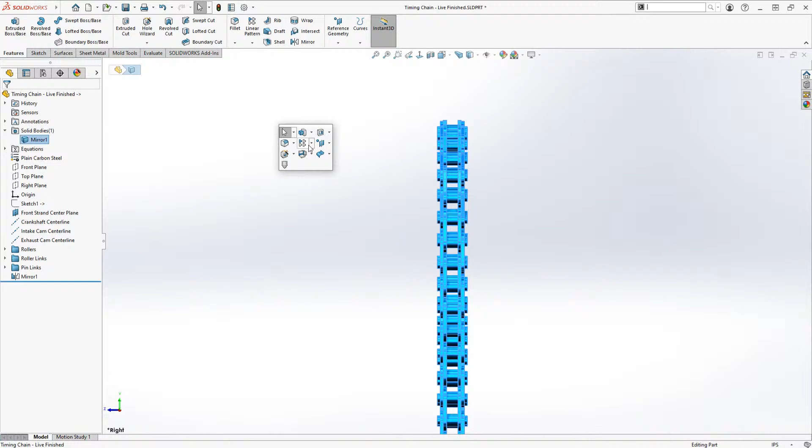Another type of pattern is a mirror. We can actually mirror bodies and say, merge these together. And you'll notice here that I went from 106 bodies previously to one now. In fact, we can mirror that around our front plane because we mated it in the assembly in the appropriate location, and we can merge those together. Right. So it's effectively doing what we used to call the Boolean operation between the bodies.

Got it. Absolutely. So one thing I want to do here is turn on some sketches really quick in my rollers. Let's just turn them on. I'm going to turn on that sketch and this sketch because we're going to use these. We're going to get into the assembly.

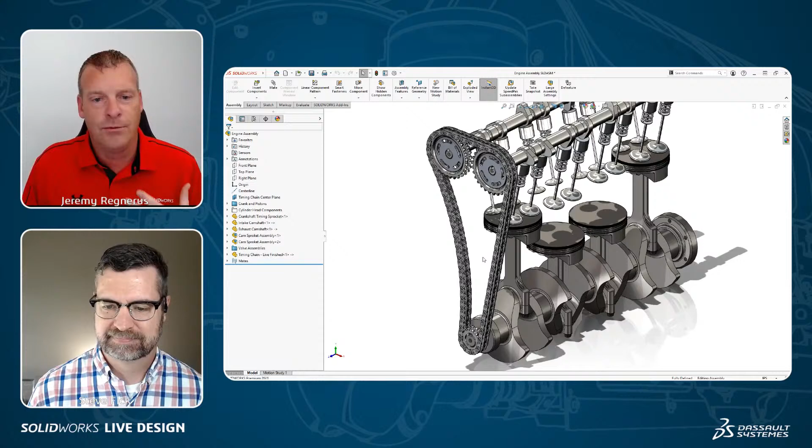So this is great if we want to create a fixed position assembly. But everybody at the beginning saw we had motion in there. Oh, I forgot about one of the biggest problems in here, and that is the sprocket. So if I roll back in my part design to just the rollers, guess what? They don't line up perfectly. There we have a bit of a problem. Well, there's a reason this actually happened this way.

When I originally mated this sprocket to this camshaft, if I look at this camshaft, you can see here's a mate. I said make that camshaft and that sprocket parallel to one another. Let me go to front view here. Well, at the end of the day, I need this location to line up with one of these pin links.

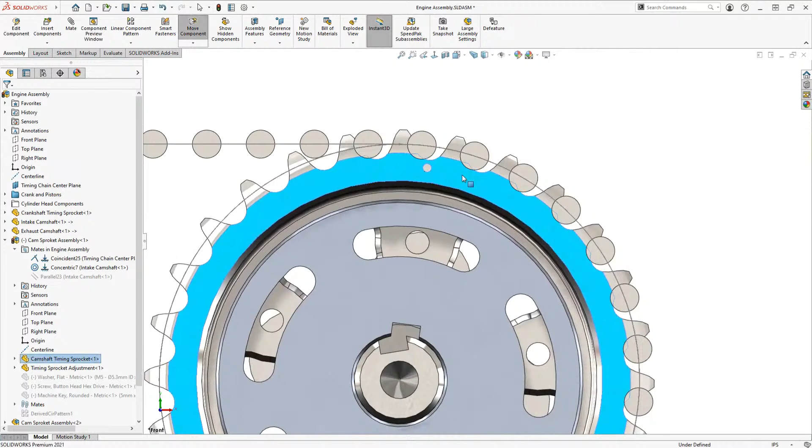So what we can do here is I'm going to suppress this parallel mate, and I've added some top-down assembly sketch relationships between these keyways. Watch when I click rebuild. Notice how my keyway updates, right? So what we're going to do is align this to this entity right here.

And I'm going to basically just grab the right plane here, and I'm going to turn on my temporary axes. So temporary axes are these axes that are created on every cylindrical feature in your file. And I'm going to select the center of that arc. That sketch is getting in my way. I'm going to make those coincident to one another. Look what happened. My keyway lined back up. So now I have a proper keyway of my camshaft that matches my sprocket.

Right. I'm going to do the same thing over here. I don't want to dig for that sketch. Look how I'm going to do this one. I'm going to use these breadcrumbs again that we saw earlier, but press my D key. I'm going to go to my assembly and look, here's, oops. I'm going to come up and I'm going to select that parallel mate and I'm going to suppress that.

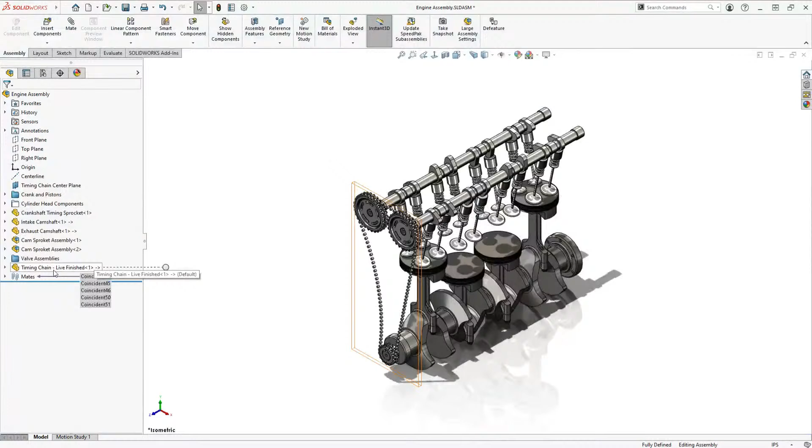And this is really the power of top-down design, right? Because what you've built into this is the fact that that shaft isn't rotating. What you need to have rotate is the keyway itself to ensure that it stays lined on the cams, right? Yep. Okay. So now we have everything lined up, and now I can come in here and I can edit this part, and we're just going to tell it to roll back, roll to end.

All right, so we finished our chain design, but we want to see how we do it in an assembly. Well, we're going to cheat. We're going to steal that profile that we used on this chain to drive our chain in our assembly. So I'm going to start a sketch, and we're actually going to use top down the opposite way. We're going to, I guess you could say, go bottom up a little bit. I am going to come in here, and I'm going to turn on some sketches, and we're going to grab this sketch. We're just going to say convert all the entities, and we want that sketch for that roller profile

right here. Now, I don't want that whole sketch. I just want that arc right there. I don't want all those circles. So we're going to, again, do convert entities. And I'm going to exit the sketch so I can now hide this so you can see what's going on. So if you look, this sketch is kind of where we were trying to get before.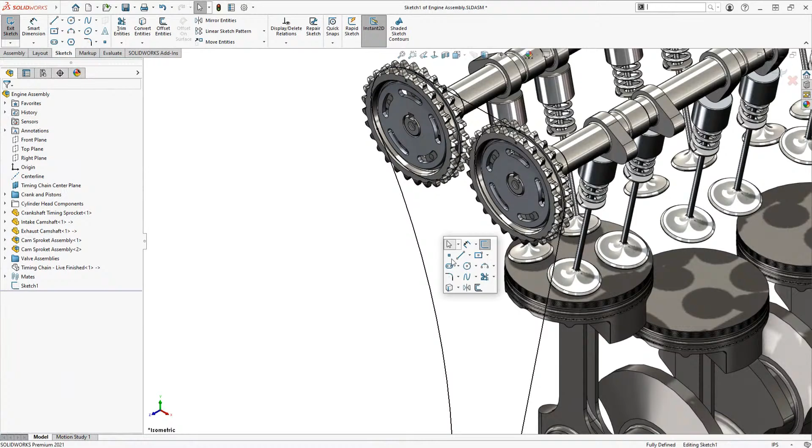I'm going to edit this, and we're just going to trim some of these entities. I'm going to trim this entity, this entity. So basically, that is a trace of where our chain is going to go. It's just living inside of the assembly, at the assembly level at this point. Got it. That's our chain path. Okay. And I'm actually going to suppress this guy right now, because we're going to show how a couple things are going to get unlocked.

So now we're going to get a little bit crazy here. We're going to take all these mates off that were created. The problem is, because I've done this, look what happens here. This thing is free to move around, and that could be a problem. So I'm going to undo that movement because I want these two to actually move together. So when I come in here and I turn these mates off, right now these two don't move together. That's a problem, right? Because in fact, if I click rebuild, look what's going to happen. It's just going to keep updating that keyway.

Yep. So let's undo this. Oh no. I can't undo that apparently. So let's unsuppress this and let's unsuppress this to get everything back to that home position. So now they're all back. What I'm going to do is I've got the keyway defined. I actually don't need it to update anymore. So what we created was an external relationship.

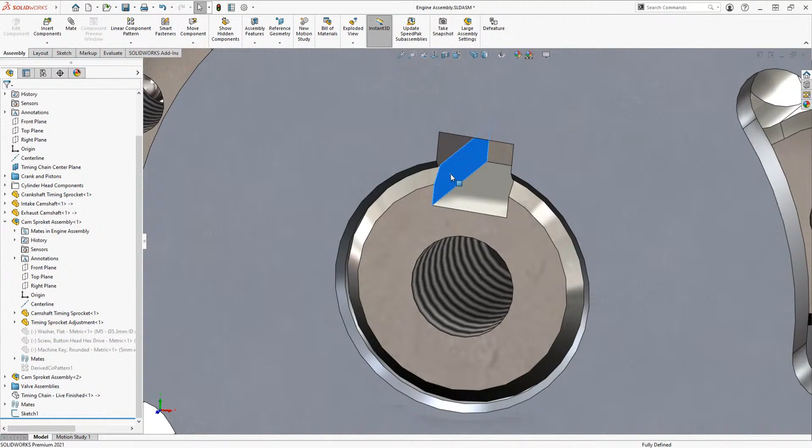I'm just going to right click on this feature, and you'll see under this feature, I have the external references on that cut extrude. I'm going to lock those. I don't want them to update anymore. Yeah. Right click, I'm going to lock this one. I'm going to right click, I'm going to lock this one.

So locking external references is if you're scared of top-down assembly design and things changing like what we just showed, you can use it to create your geometry and then go back and lock it, or go into the sketch and fully define it after the fact. Yeah, I was just going to say, I think this is one of those things where people get really hesitant of top-down design, but if you know a few of these little tricks, it actually makes life so much easier, and you get to benefit from all the powerful capability that it provides.

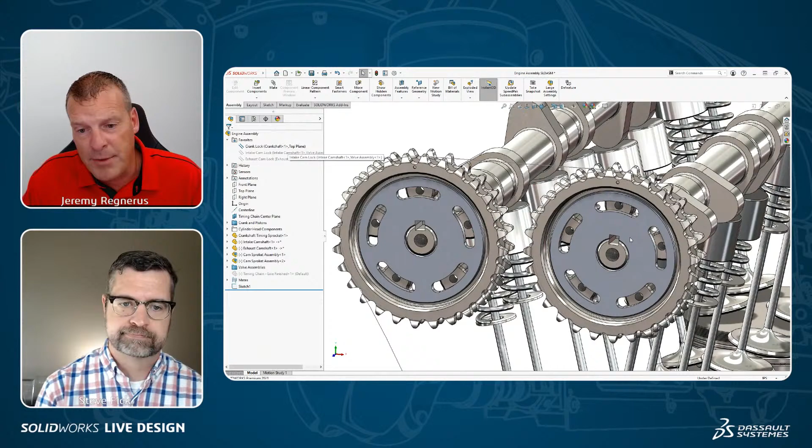Absolutely. So now when I suppress this, what I'm going to do is I'm going to mate these two components together so that they move together. So now they're always going to rotate together. So the sprocket drives the camshaft.

Now you might be going, cool, now you're going to use the chain to drive this. Well, I'm actually not. I'm actually going to use a different type. Let's create the chain pattern because we're over on time right now. No, I'm gonna do it the way I was going to do it. We're going to hide this guy really quick. The way I'm going to keep these in sync actually isn't going to be with a chain pattern.

Now you can do this two ways. I talked earlier in assemblies, we actually have a feature that helps you create belts. So say I wanted to create a belt here, you could create a belt or chain feature. Maybe you don't actually want to design the chain, you just want to capture the movement between these two components. I can select those pitch diameters, and when I do that, there's an option here called Engage Belt.

And when I do this, I can go ahead and press OK, and now all of these components, oops, it gave me an error because it's trying to drive it, but yet I'm not allowing any of the components to move, so we'll suppress that. So I've already got that motion. So that's all you really needed to do at the beginning to get to there. So another way you could do this is not with the belt feature, because this belt feature is cool because it gives you the length of the belt.

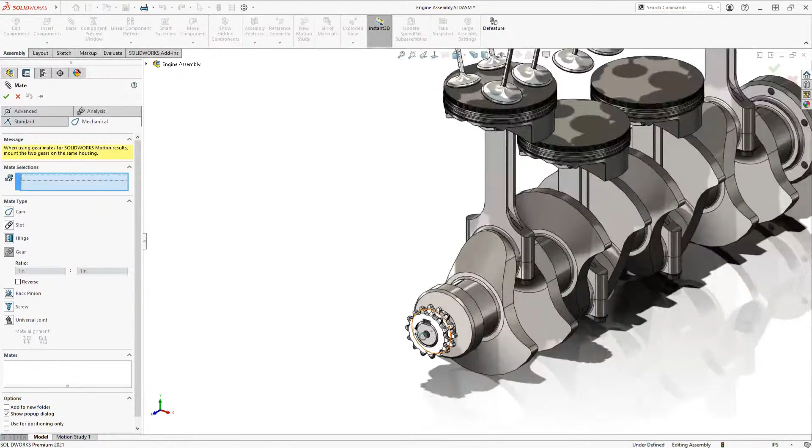Right. I actually want to do this with mates. I want to use mechanical mates myself here. I'm going to come in and we're going to create gear mates. Now, gear mates in my last live design where I did gears were for meshing gears. Well, these can also be used for pulleys or timing chains. All you have to do is choose this reverse option.

Now, the ratio, you'll notice, it automatically captured the diameter of those pitch diameters. And that's why pitch diameter is so important. That's actually what's defining that ratio. I know it's 2:1, but here I'm just going to let it grab the value that's already there. Right. And as soon as I do that, look, these two components now move at that 2:1 ratio right there.

Jeremy, do you have a reason why you tend to use one over the other? Why I use a gear mate over that belt chain? Yeah. Because the belt chain actually creates kind of a more complicated feature in the feature manager tree. It can over-define the assembly more. Remember when this mate was unsuppressed before, I had an error. I don't get that error with the gear mate. That's a heavier feature.

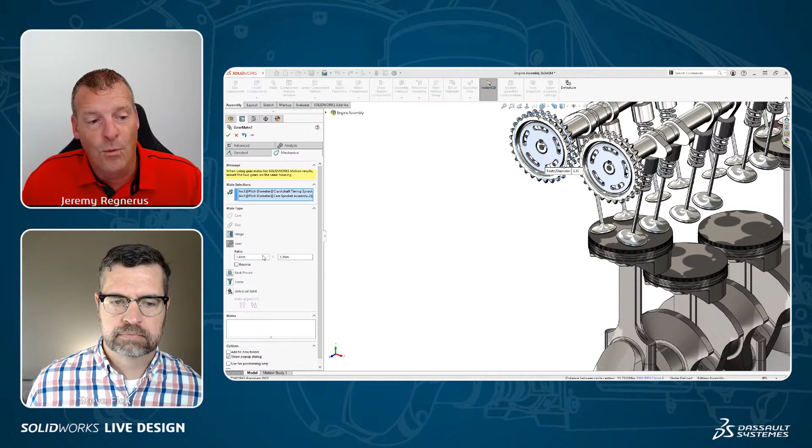I think creating two gear mates is a little more lightweight, and it gives me a little more flexibility. Like maybe I want to cheat and I want to say, actually, I don't want them to be 2:1. I want to look at what a 3:1 ratio might look like. I could come in here and manually change these values. Oh, right. Okay. Where with the belt pulley, you can't do that.

So we're back here. Okay, we're unsuppressed. Everything's moving. Everything looks good. Last step. Let's actually lock everything down really quick. We're going to build our chain. I'm going to insert these two components, this roller chain and this roller link.

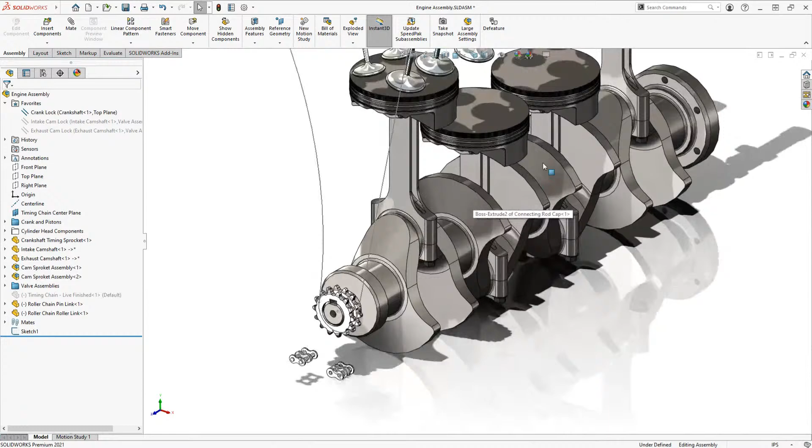Boom, boom. And the chain pattern, the chain mate is actually not a mate. I've been calling it a mate. It's a pattern. And it's actually a super powerful pattern. We're going to turn this sketch back on. And it's a pattern that can automatically instance components around a sketch. So we're going to go up to our patterns, and you're going to see this chain component pattern.

And you might be wondering, well, don't you want to pre-locate these components? The answer is you actually don't. If you add too many mates to chain link components before you add the chain component pattern, it can cause some over-defining issues. So I'm going to give you a couple tips here on how to get things positioned just right with the chain pattern.

So the first thing you could do is you could pattern individual components. We could do a distance linkage, which was added in SolidWorks 2020, where we could set a distance between each individual component. And basically, here's how you create a chain path. You choose a path, and then you choose your component you want to pattern, in this case, our roller link. And then we're going to choose where the first linkage is and the second linkage is. So that's what these little icons are here.

We're going to grab our first linkage, our second linkage, and then what it needs is a plane that's going to be coincident to that chain sketch. Well, these parts happen to be designed with their front plane right down the middle. Every live design talks about origin placement. Here's another good example of why you want to design things in the appropriate location in that component.

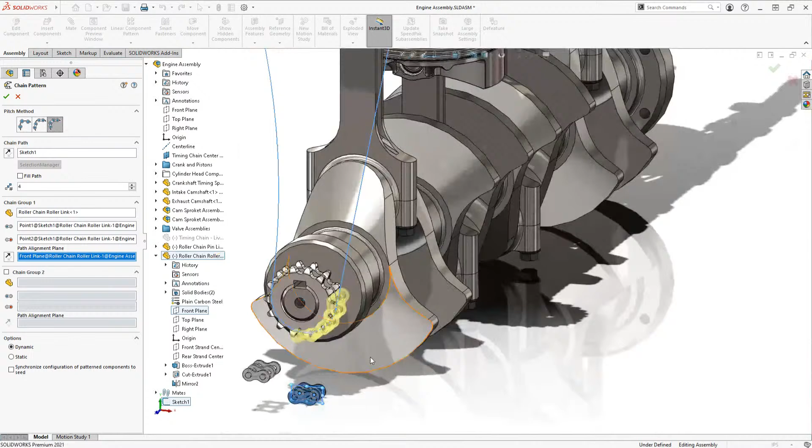As soon as I do that, look what it does. It starts patterning it. And I can create a couple instances. Now, this is distance linkage, where I can set a distance between each one of these components, in this case, 3/8 of an inch. I want to actually do a connected linkage, where it can just connect those one at a time in case they were transitioning links, or we can add a second chain group.

And in this case, I'm going to grab this component. And just like before, we're going to grab our first linkage spot here, our second linkage spot. And again, we're going to grab our front plane. And notice how it automatically starts patterning that component. We're going to come back to this. I want to talk about getting this lined up and why didn't I do the full pattern right away? The reason is I want to get this guy located on this first linkage right here.

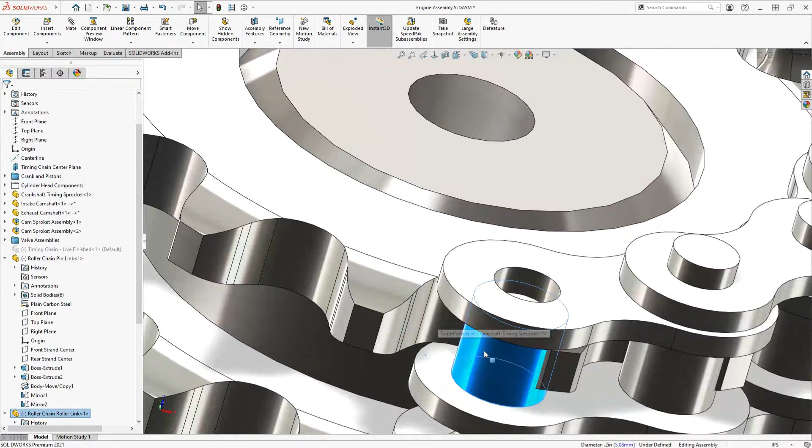Everything else in my design is fixed. Nothing else is moving. I'm going to add another mate that I want to use for reference. I'm going to make these two concentric to one another. And I totally did that wrong. I want to actually click the mate icon. The reason is sometimes you want to use a mate just to put components in position. And there's a checkbox down here called use for positioning only. When you use this, it'll honor the mate, it'll move the component, but it doesn't actually create the mate in the feature manager tree.

So that part, I could drag it right now, but I wanted to get everything lined up really nice. Now I could have created a concentric mate and put it up here in my favorites as a locking mate, but I wanted to show people for positioning mates. I think that's a huge little tip, especially if you're a machine designer doing this kind of stuff. The mates are so powerful to just get things where you want them, but you don't necessarily want to commit to it, right? So that option is so handy. Use it all the time with a lot of moving parts.

Andrew Gross, the guy running the stream on the back end, did a really cool live design episode where he talked about locking components while he was mating too, fixed groups, which is really cool. That was where he was designing that bike suspension. I really recommend watching that.

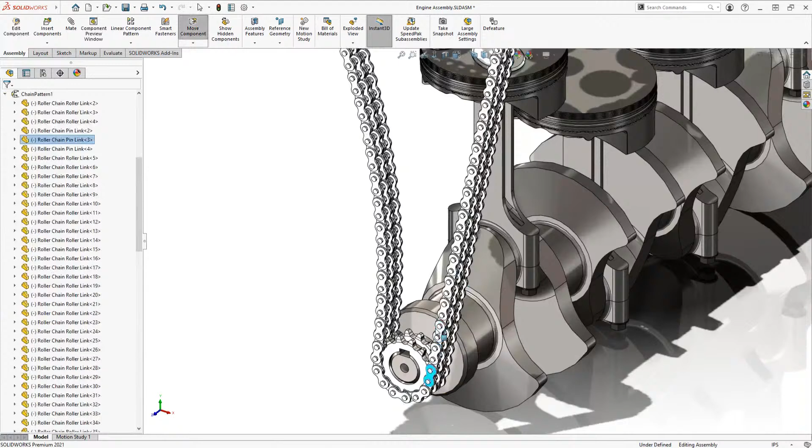But okay, so we need to finish the pattern. Just like with the linear pattern, I don't want to figure out how many I need. There's a really cool option right here called fill path. Now that I've got it all located, I'm just going to hit OK. And there is my chain. Now, here's the problem. This chain isn't tied. It moves. I don't know if you can see that moving. Let's undo this. I'm going to make it really obvious where this is moving.

We're going to take that first component, grab some candy apple red, and drop that on just that instance so we can keep an eye on that. I want this chain. So these components move. No, they don't. I have them suppressed right now. For that, I have them locked.

These components move freely, so I can see that I have that motion. You're going to see me undoing so that everything goes back to where it was. And the chain moves separately. So how do I make them move together? Well, we're going to use another type of advanced mate, and I will tell you about the limitation that comes with this mate.

What is a type of mate that allows rotation and linear motion? I'm going to say rack and pinion. You are absolutely right. So we can use the rack and pinion here, and we can do: for every number of revolutions, how far does the chain link move? That sounds really hard to me. Guess what we're going to use again? Look at this, pinion pitch diameter. Yeah. Hopefully everyone's learning how important pitch diameters are. Yeah, it's huge.

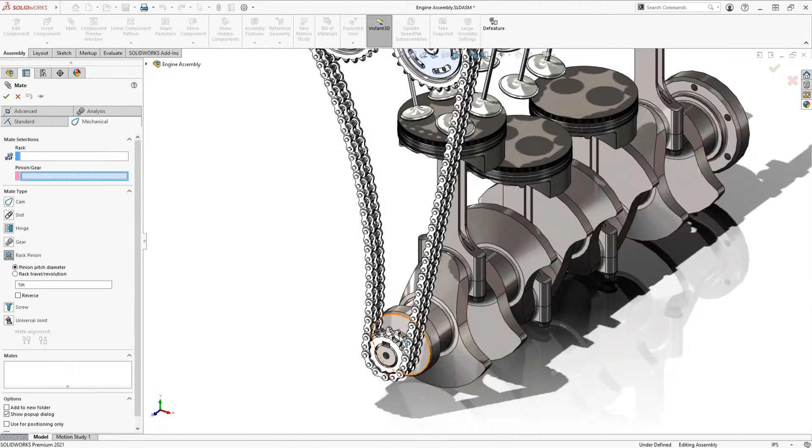And for our pinion gear, this is really easy. We're going to turn on my sketches with my hotkey, and I'm going to grab that pitch diameter. Now the rack is the tricky part. There is currently a limitation where SolidWorks doesn't like the rack to go past a certain linear motion. So what I'm going to do is grab one of the chain links up here, and that's why I have these sketches turned on.

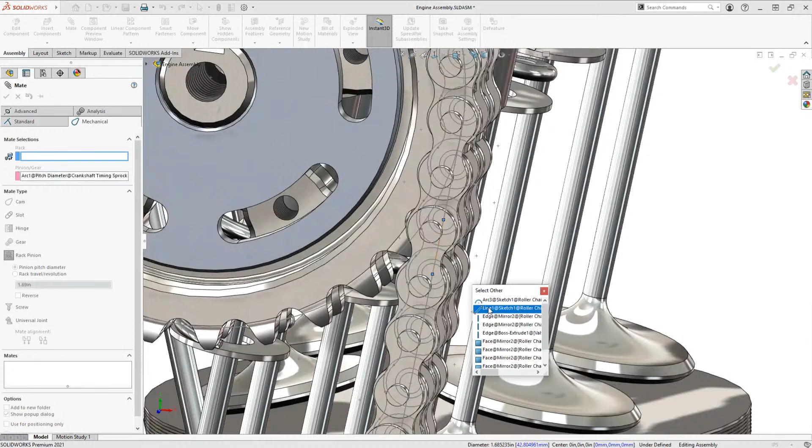I'm having a really hard time grabbing it. So we're going to right click and do Select Other, and hopefully I can grab one of those center lines. This is another tip: if you have a bunch of edges on top of each other, this is a way to grab an edge underneath another edge. We're going to grab that line. You see it thought there for a second about how this is going to work. We're going to hit OK.

And now I'm going to cross my fingers that I did everything right. No, I'm pretty confident in this. We're going to grab a hold of this, and you can follow the red chain link as it goes around here. So we have gear mates driving basically the drivetrain, but that rack and pinion is what is driving our chain along that motion there. That is so cool.

But what you will see is it'll get to a certain spot where it's about to cross this threshold up here, and it doesn't want to go anymore. There's some weird limitation with a rack and pinion mate. It was really made for a rack and pinion, but you can get away with using it here. Sure. Yeah. Just keep that in mind. So pretty cool. I'm going to undo this and get it back to the beginning.

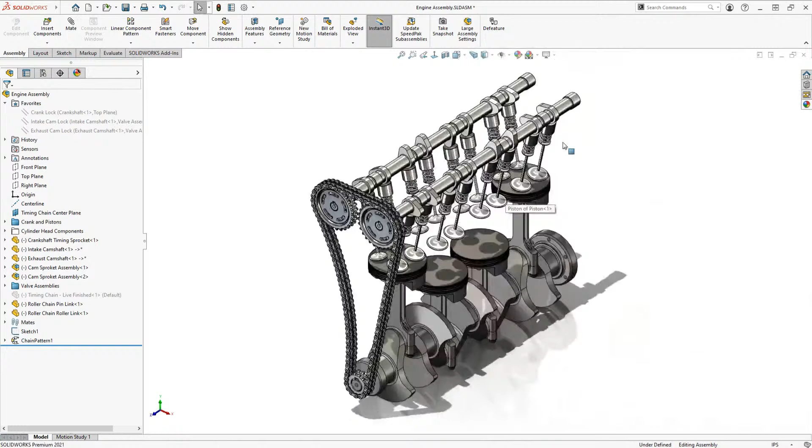Anyway, that is it. We went way over, 15 minutes over. I appreciate everybody's attention, staying with us. Hopefully this was enjoyable for everybody. I think you had a huge amount of fans very impressed, Jeremy, myself included. I think we all learned a few things. You definitely did some deep cuts on some of those. Yeah, this was a more intermediate to advanced topic for sure. Yeah, but along the way we all picked up a few little tips that are just super helpful to make those things happen.